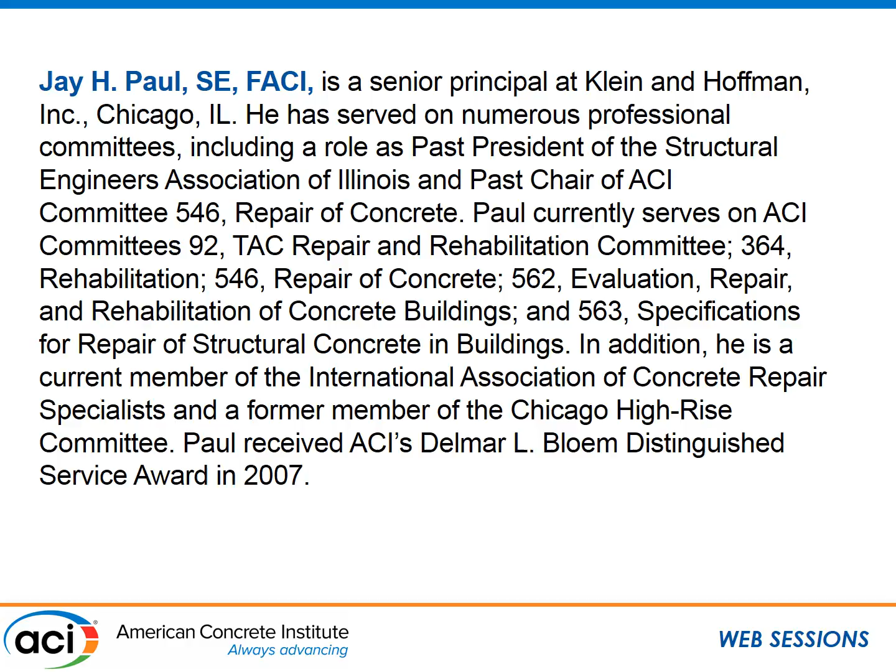I'm going to talk about Chapter 9, which is construction, and Chapter 10, which is quality assurance. This code assigns certain responsibilities to the licensed design professional, and I'm going to focus on those responsibilities.

Starting with stability and temporary shoring requirements. Typically, the design of shoring and bracing is the responsibility of the contractor. I'm going to refer to AIA Document A201, which is the general conditions used on probably most architectural jobs in the United States. It states that the contractor shall be solely responsible for and have control over construction means, methods, and techniques.

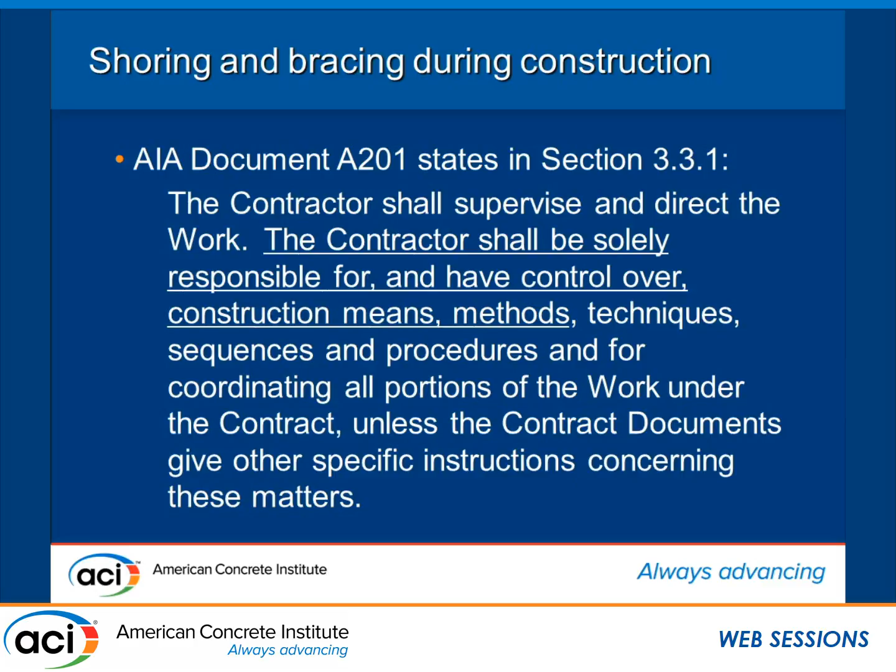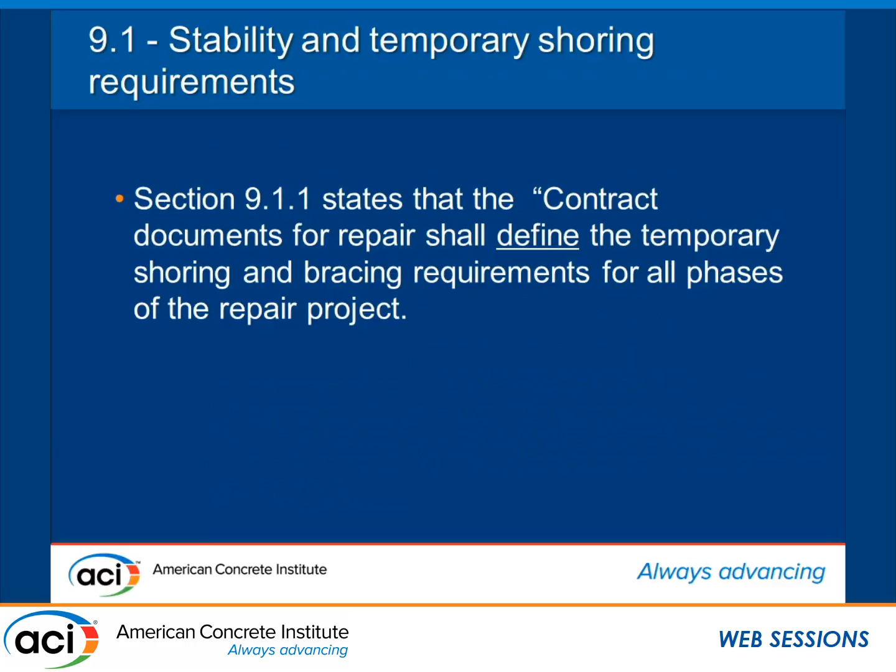Section 9.1.1 of the code states that the contract document shall define the temporary shoring and bracing requirements for all phases of the repair project. It goes further to say in the commentary that the load, spacing, and placement requirements for temporary shoring and bracing at all phases of a repair should be conveyed to the contractor.

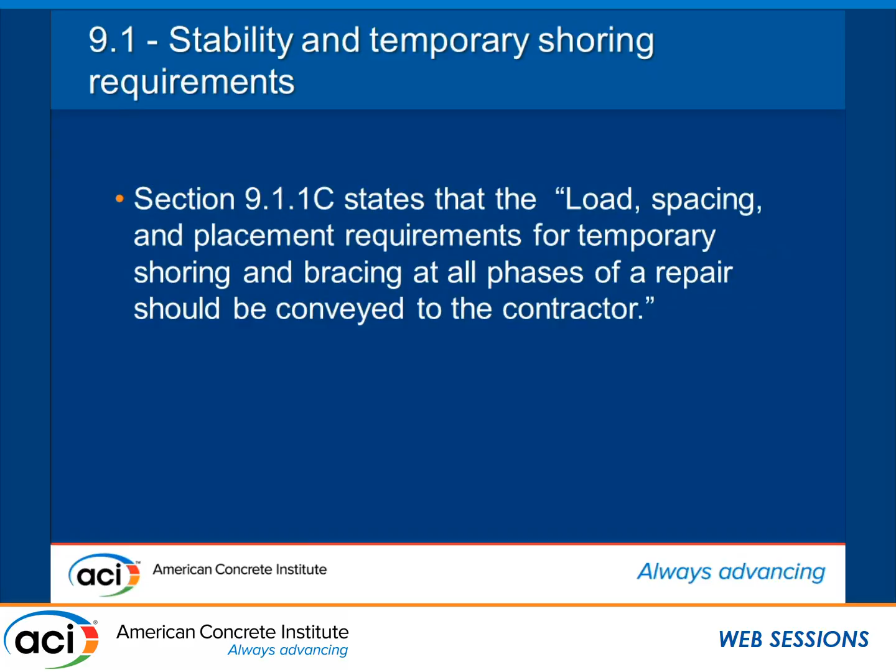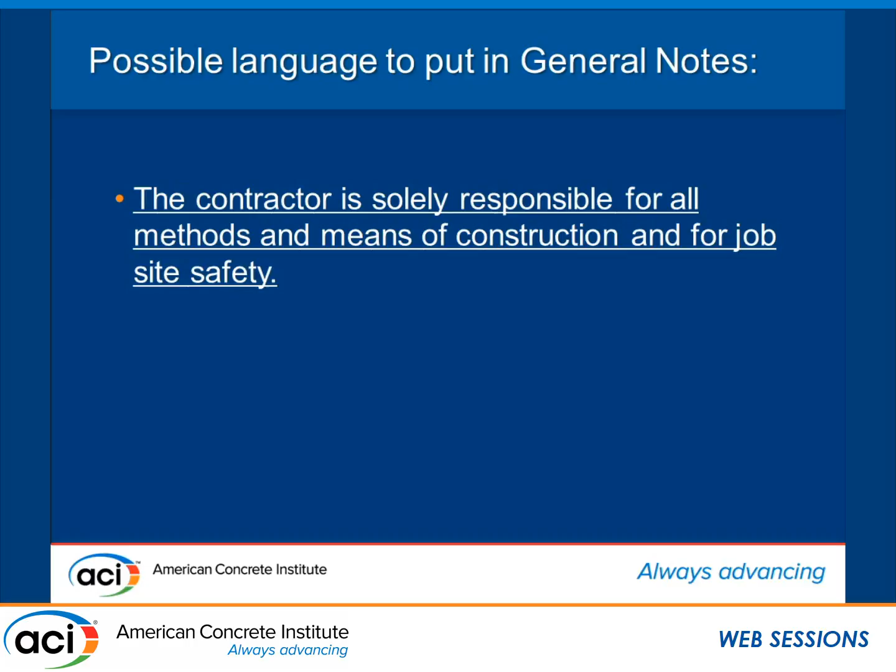This is language we put in our general notes. You may use similar language in your jobs: the contractor is solely responsible for all methods and means of construction and job site safety, and the contractor is responsible for the design, installation, and performance of all shoring and bracing.

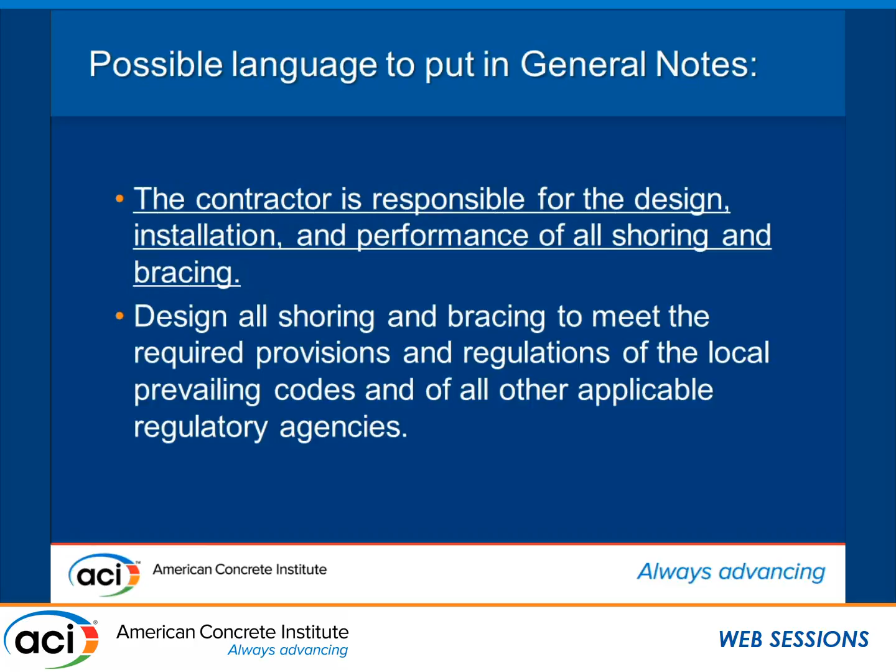But this is unique to repair work. We have a note that says, provide and install all shoring and bracing prior to the removal of concrete. That's in case something dislodges, or there are changes in moment distribution and so forth as you take these buildings apart. So it's really important to pay attention to that.

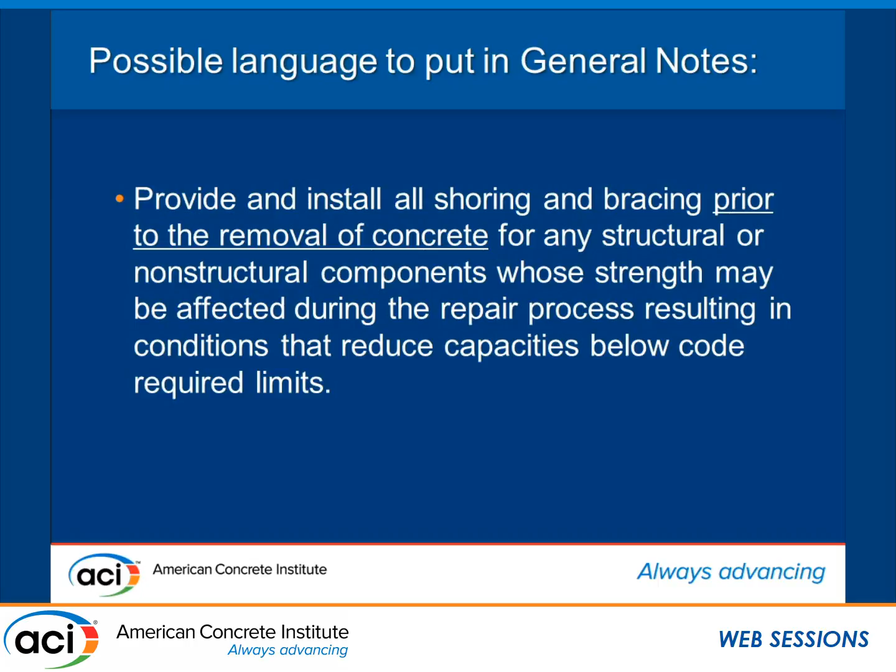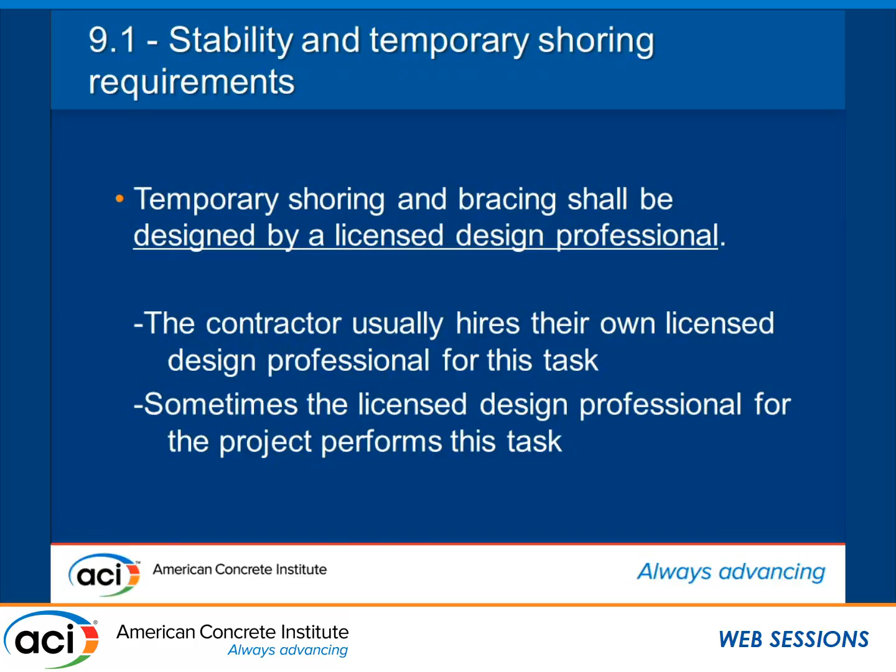Temporary shoring and bracing shall be designed by a licensed design professional. Typically, the contractor hires their own LDP for this task, but sometimes the licensed design professional for the project may perform this task.

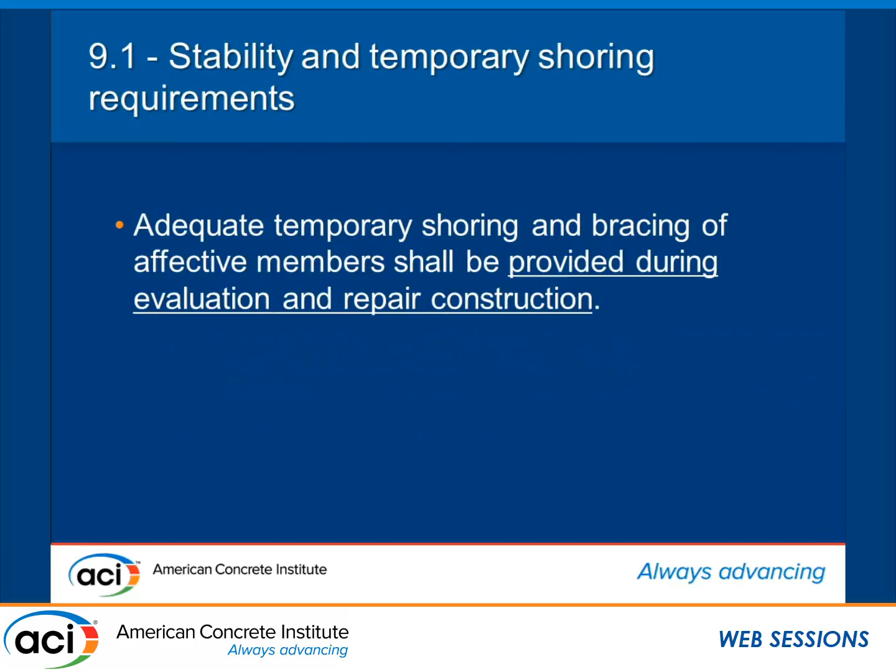Adequate shoring and bracing of affected members shall be provided during evaluation and repair construction. Typically when you start, you may not have any shoring, but there are times when it's necessary.

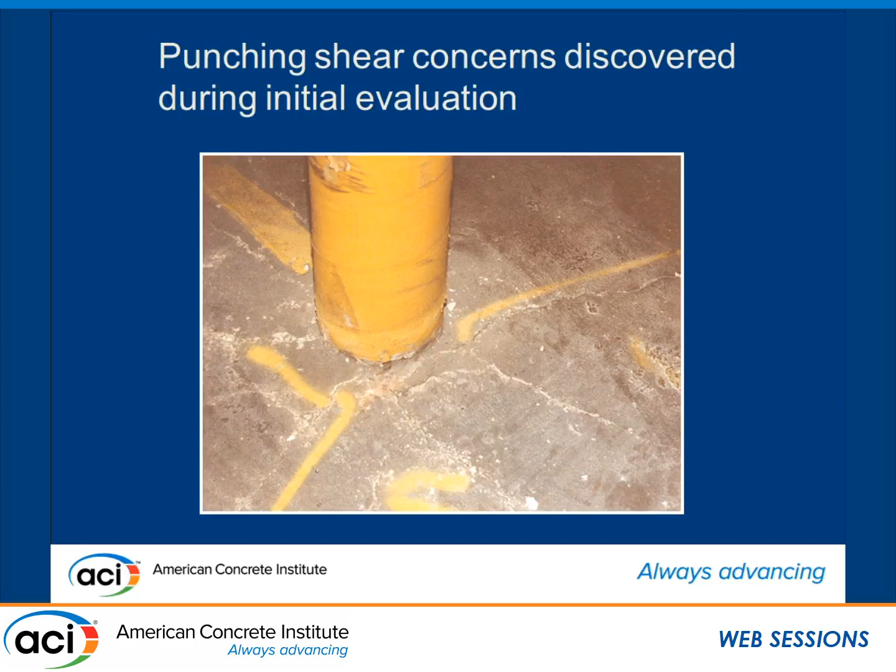This is a project that we had, the second level of a parking structure. We went in there and got very concerned when we saw the radial and circumferential cracking. Along with other tests, we determined that we have a real issue here. So we had that shored the next day by the contractor helping us with this work. And it's a good thing.

This garage was built in the 60s and it had truss bars. For what we found when we were repairing it, the truss bars had fallen over, and essentially in some spots there was no top reinforcing.

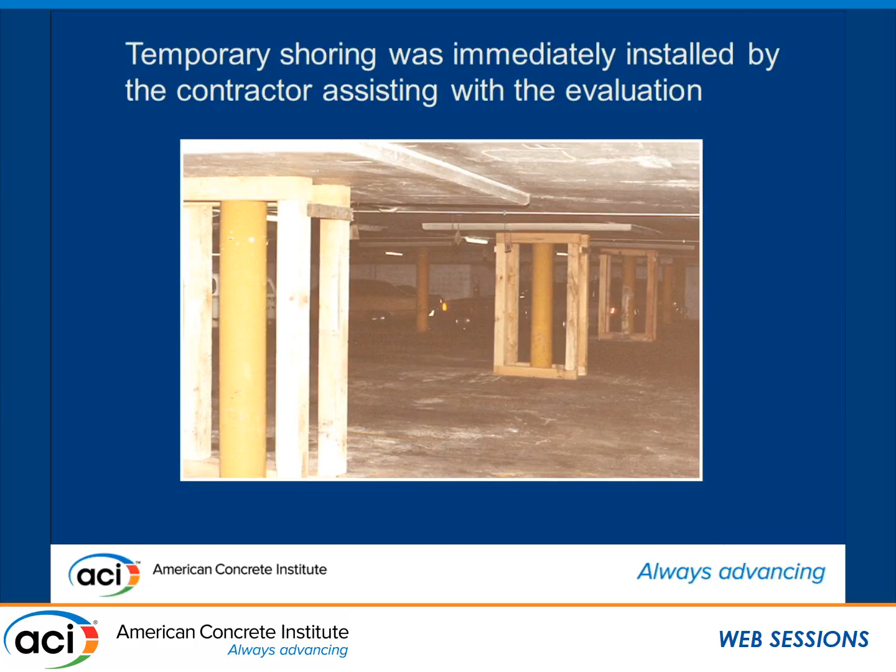Temporary shoring shall be designed to accommodate in-place conditions in the structure and expected superimposed loads.

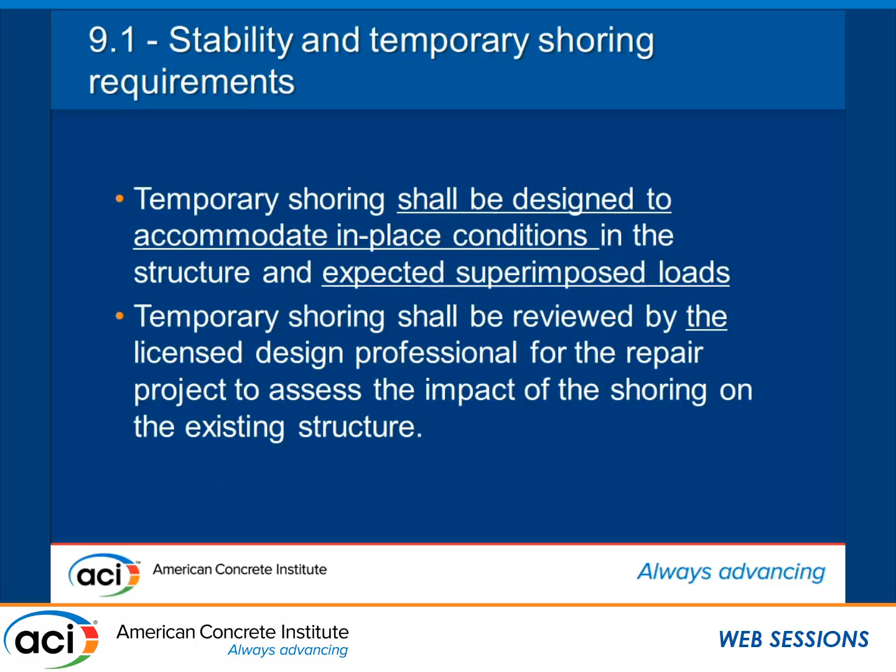It is the responsibility of the LDP for the repair to assess the impact of the shoring on the existing structure. Here's a case in point where there's a complete balcony replacement on this condominium building. It was actually our project. We had to check how many levels of balconies that shoring had to extend down to, until we picked up the construction loads.

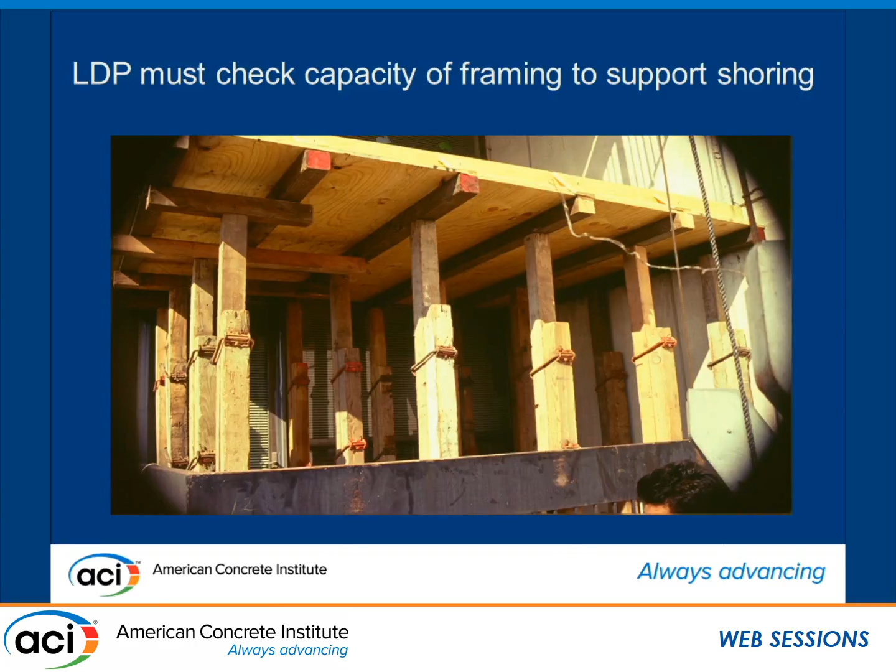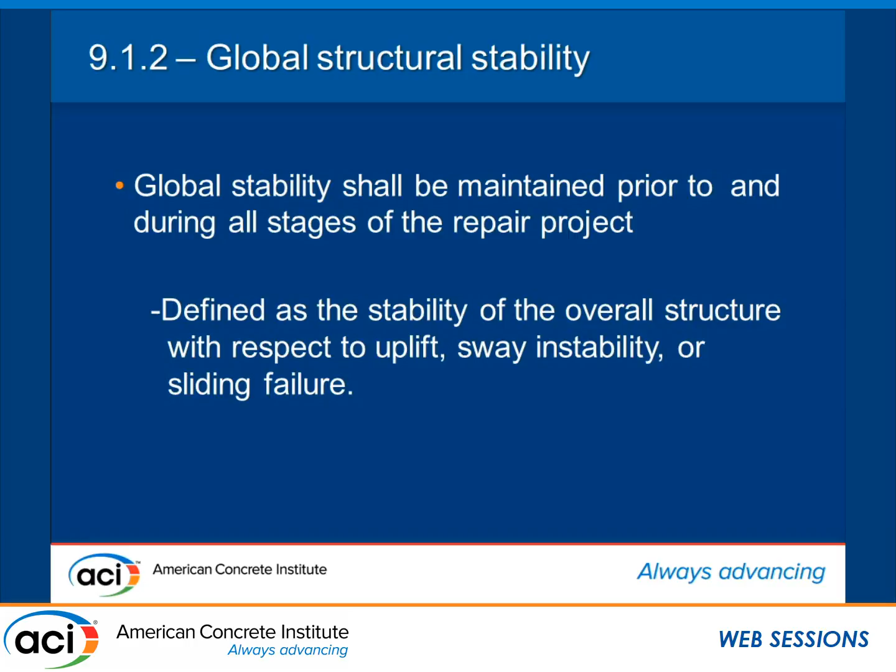Code requires that global stability shall be maintained prior to and during all stages of the repair project. Global stability is defined as the stability of the overall structure with respect to uplift, sway, instability, or sliding failure.

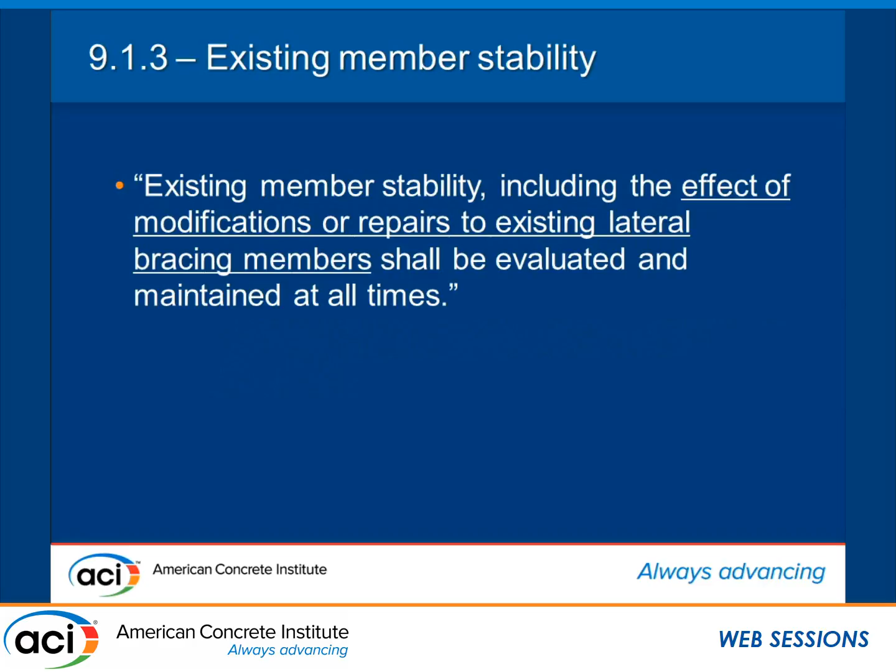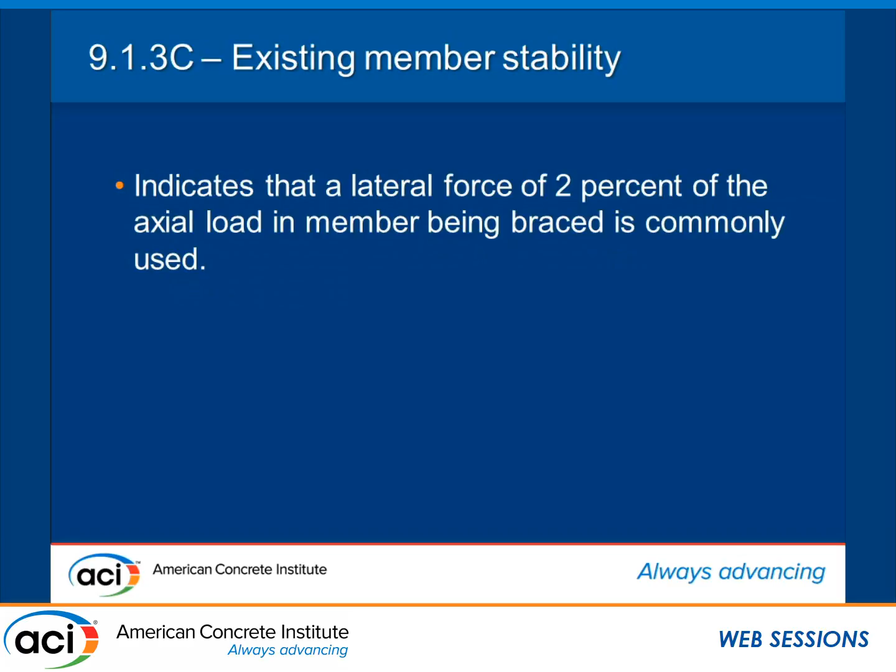We're very concerned about the effect of modifications or repairs to the lateral bracing system, especially for columns. If you remove a slab framing into that column, it may become a two-story column. The commentary indicates that a lateral force of 2% of the axial load is commonly used for the bracing force.

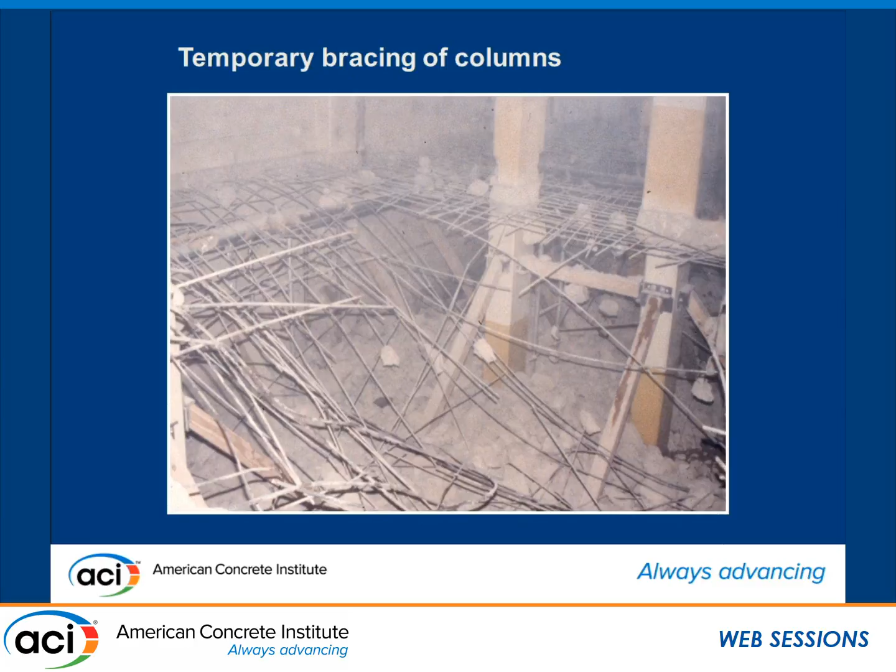Here's the interior of that same garage. We were concerned about buckling of that column, so the contractor's engineer designed this shoring system or bracing system.

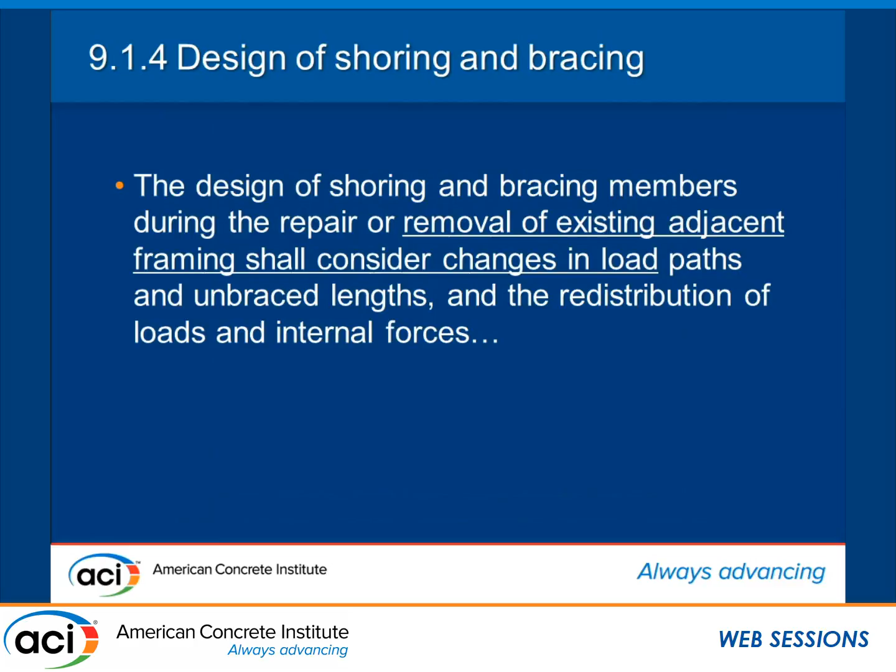The design of shoring and bracing during the repair shall account for removal of existing adjacent framing and shall consider changes in load paths.

We have a note on our drawings typically that if there's going to be removal of framing, the adjacent bays should be shored. The reason we do that is to minimize the impact of increased positive and negative moments, and otherwise you're locking in these forces in the adjacent members. So we want to deal with that.

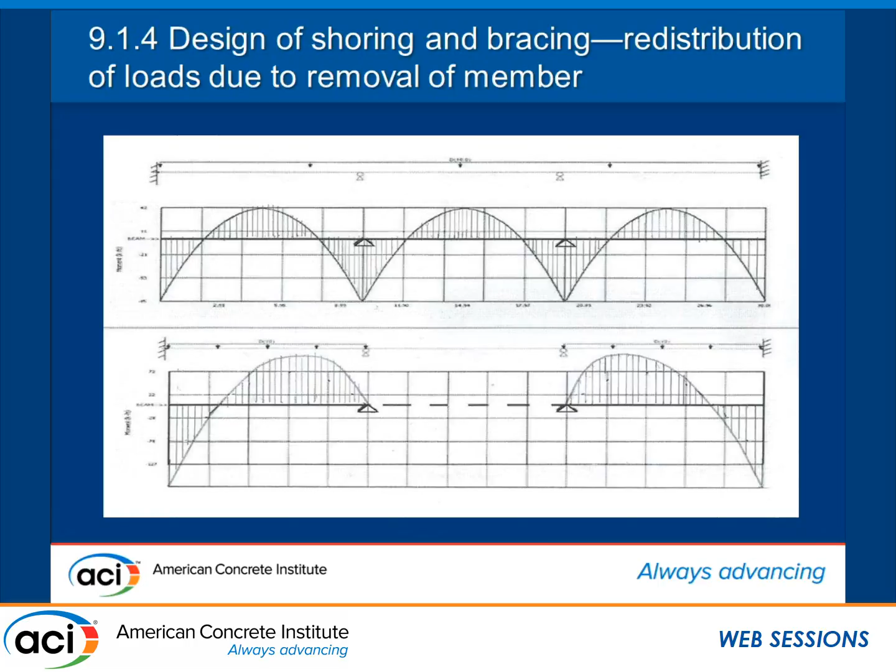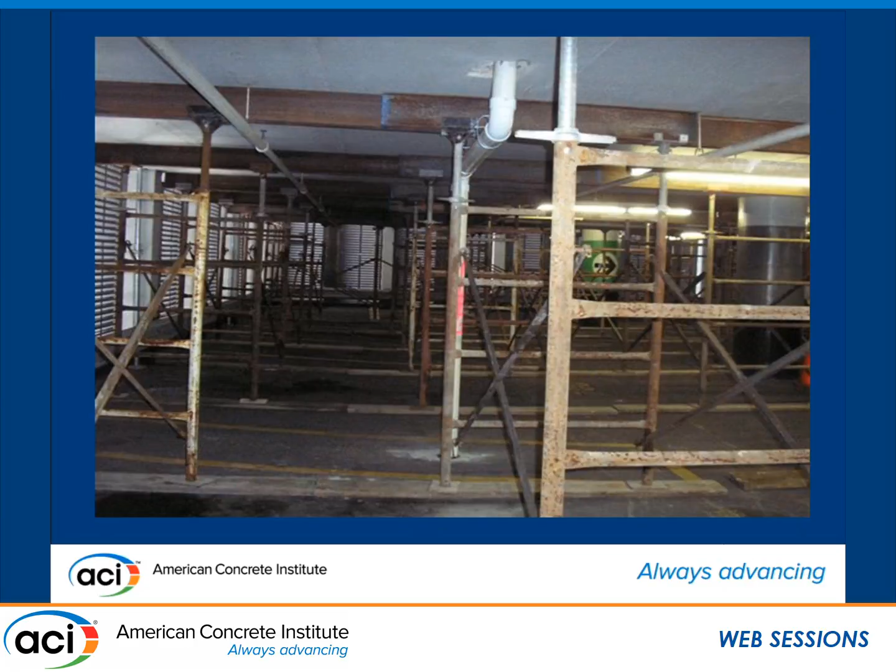This is a complete bonded overlay on this garage, so everything is shored. Obviously, the strength is reduced while that work is being done.

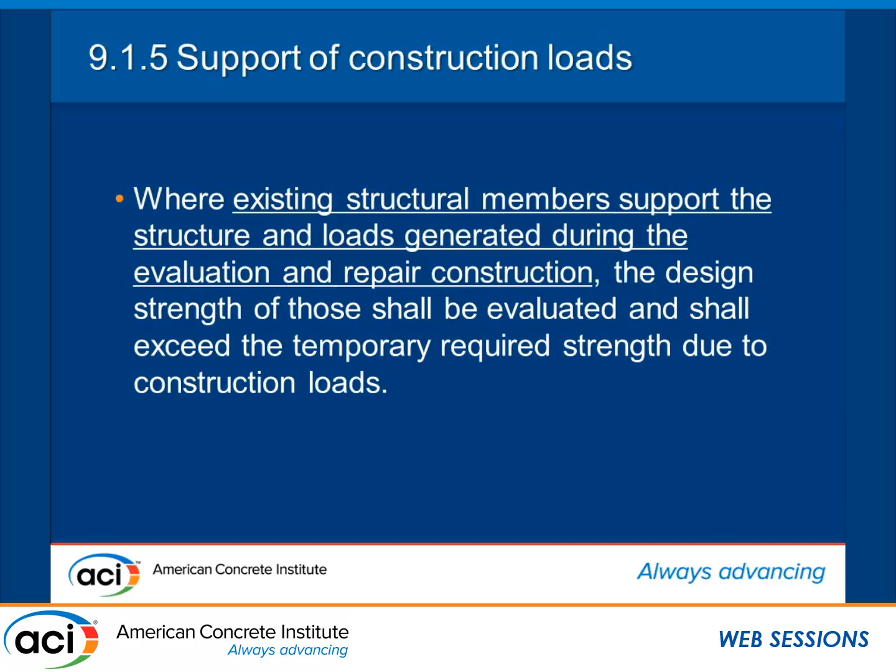Where existing structural members support the structure, and loads generated during the evaluation and repair, the design strength of those members needs to be evaluated.

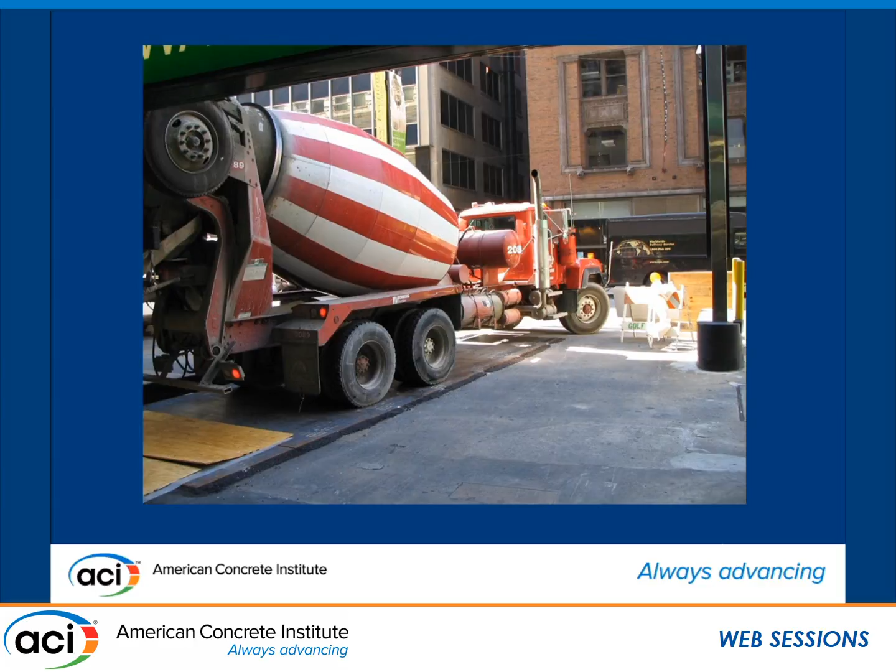Here's a case in point. This is for a parking garage. They had to bring the concrete in and back it over this driveway, which is a supported slab and framing. We found that the beams, columns, and girders beneath this were fine. However, the slab wasn't—there were some punching shear problems. So the solution by the contractor was to install steel plates.

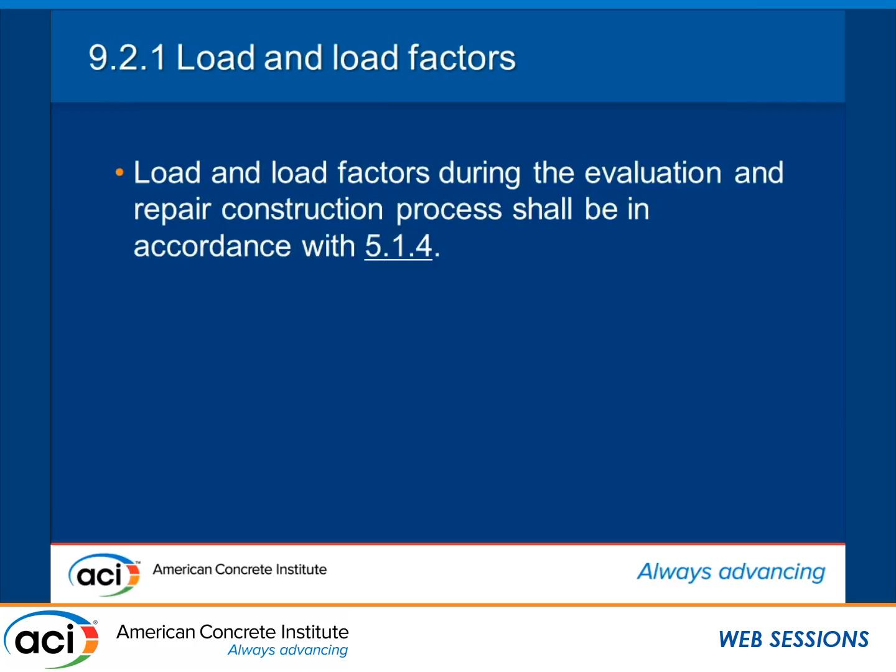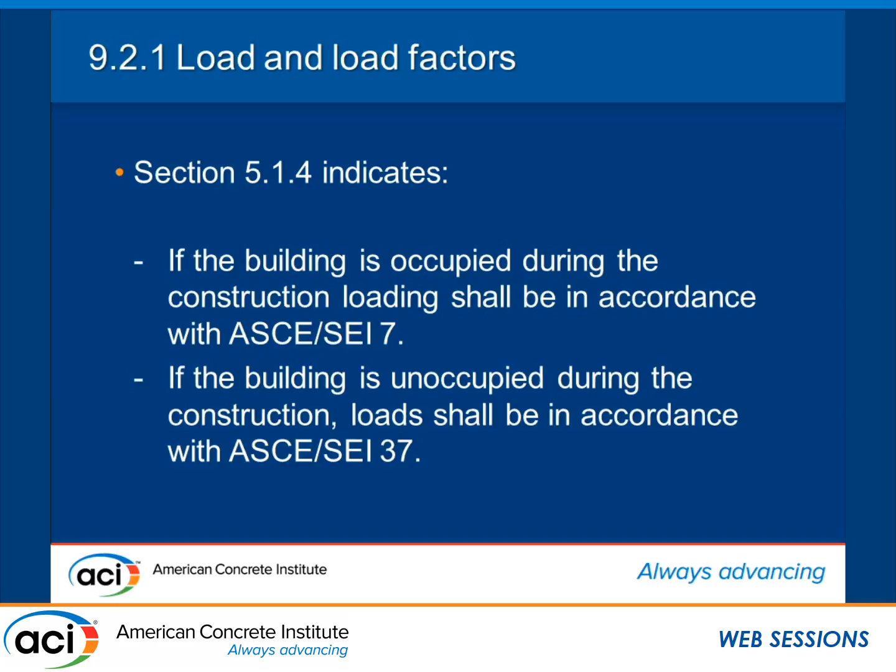Load and load factors during the evaluation and repair construction process shall be in accordance with section 5.1.4, discussed earlier. Essentially, if the building is occupied, it's ASCE SEI 7. If the building is unoccupied, ASCE SEI 37 needs to be used for the loads and load factors.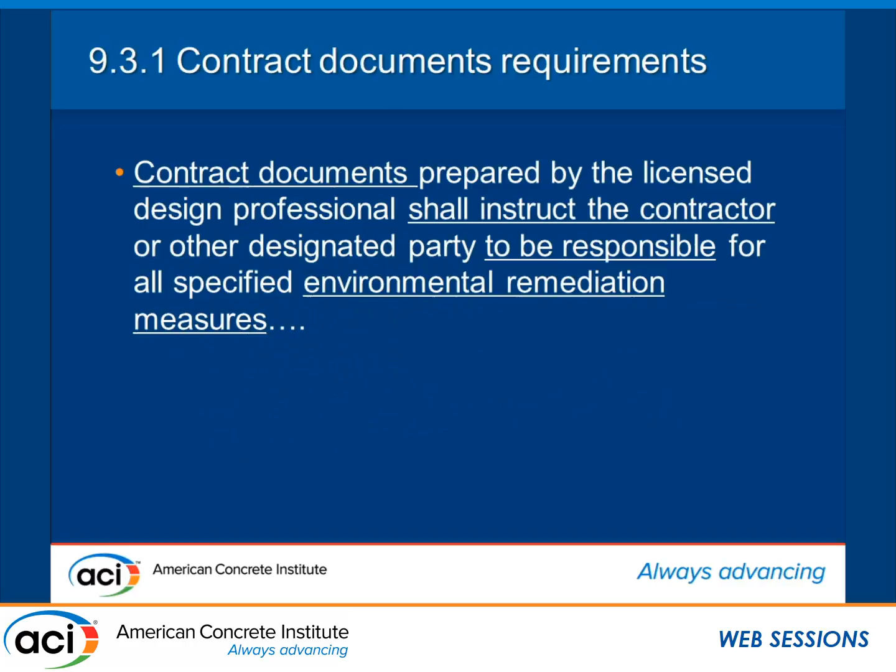The contract documents prepared by the LDP shall instruct the contractor or other designated party to be responsible for all specified environmental remediation measures.

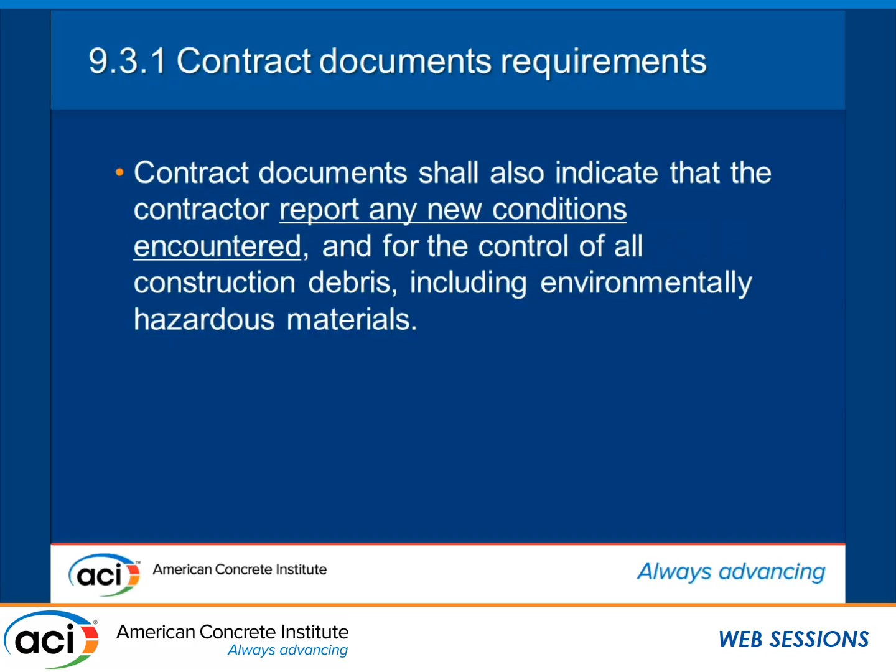The contractor shall be instructed to report any new conditions encountered, including environmentally hazardous conditions. Referring back to AIA A201, it states that the contractor is responsible for compliance with any requirements in the contract documents regarding hazardous material. But it also states that if the contractor encounters a hazardous material or substance not addressed in the contract documents, the contractor shall stop work immediately and report the condition to the owner and architect in writing.

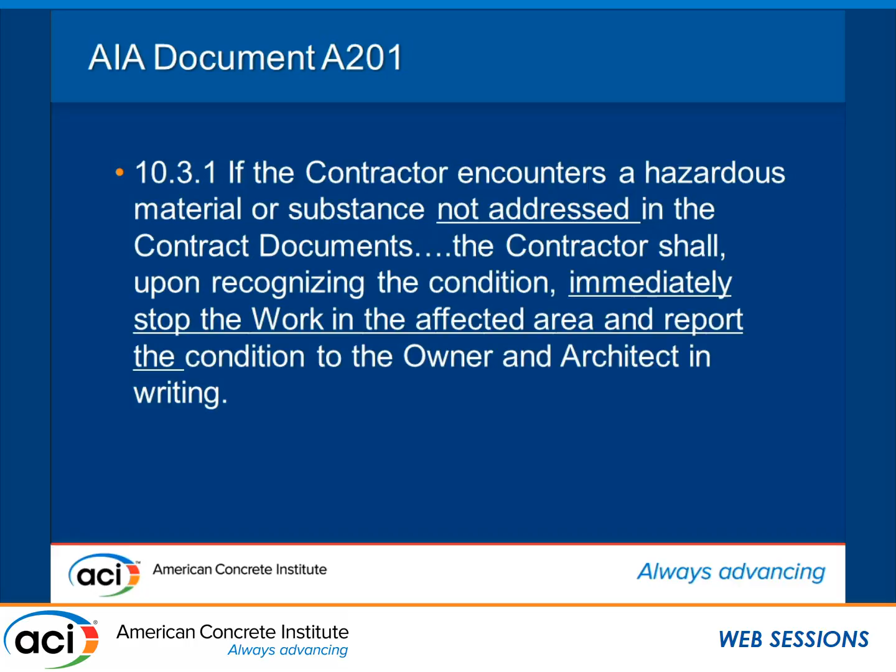Here's a case study illustrating contract documents defining temporary shoring and bracing conditions. This is a university building in Chicago. The objective here was to add an auditorium, and above that auditorium, a ballroom. To accomplish this, we had to remove 2 columns.

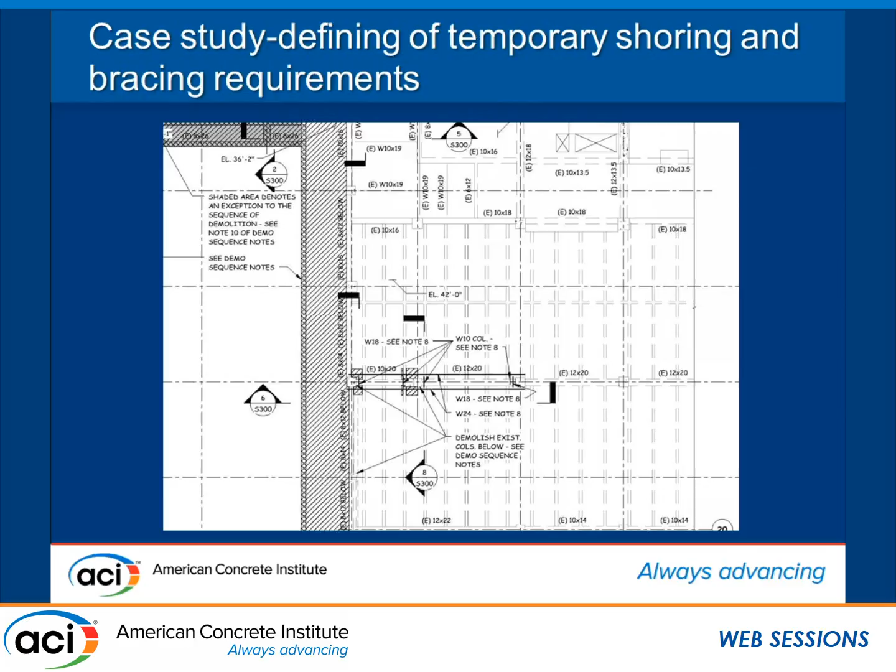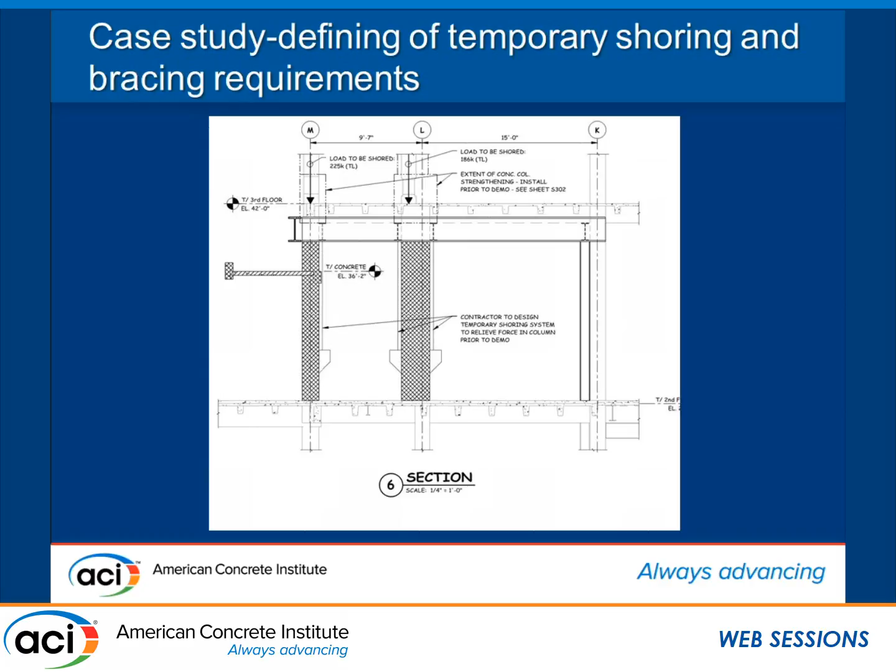So we framed the columns to a new truss. It doesn't show here, but we have a truss framing 3 bays. Let me go back again—we have the section here, across that, in front of that framing. We give the loads to the contractor, and we also have a note here that says the contractor is to design a temporary shoring system to relieve force in the column prior to demolition. It's very important. We also gave demolition sequence notes.

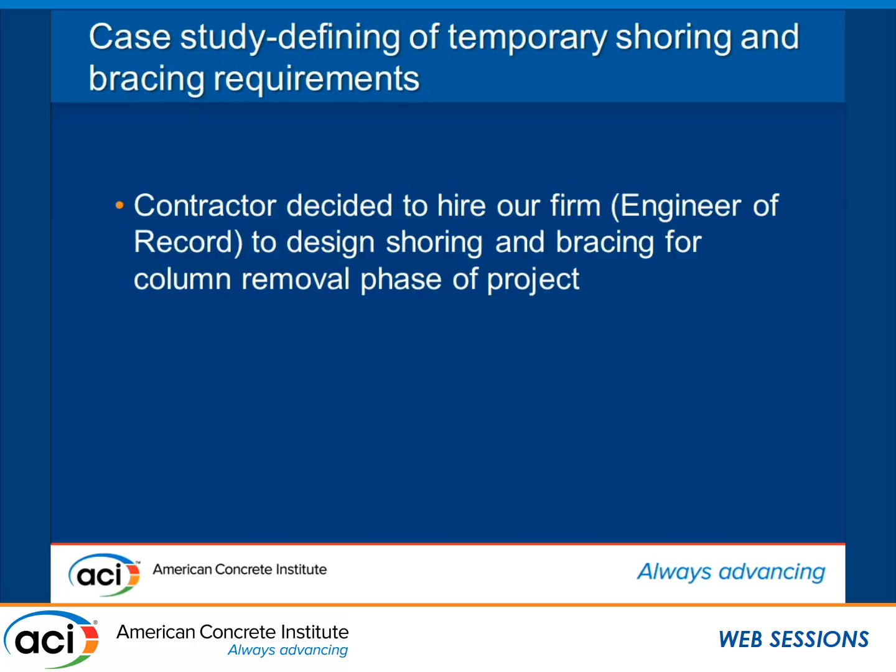However, the contractor decided not to hire his own engineer—he hired us instead to do this work. After we got permission from the university and our proper releases in place, so we limited our means and methods just to this work, we did it. We prepared a set of drawings to take care of that phase. Now our client is the contractor.

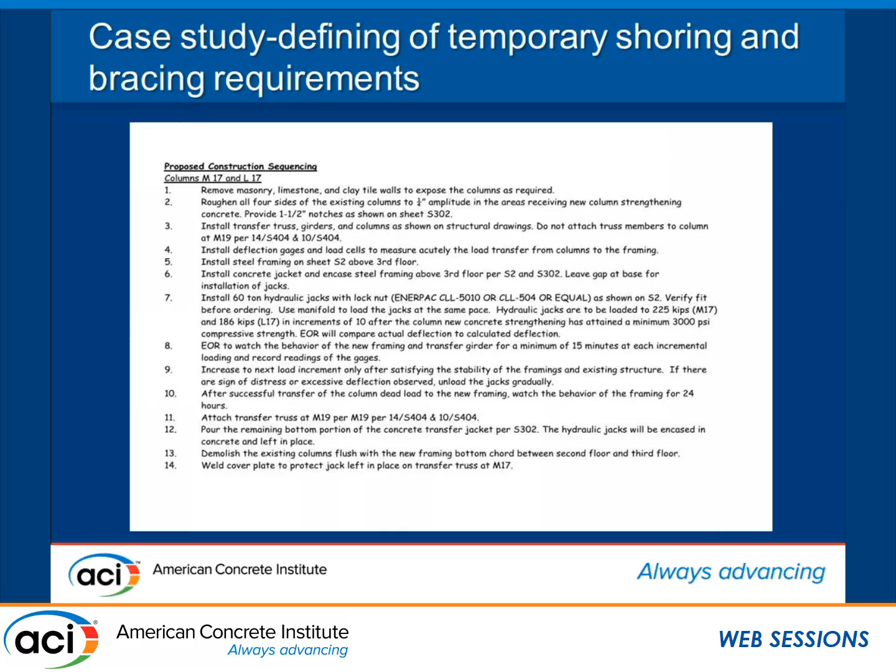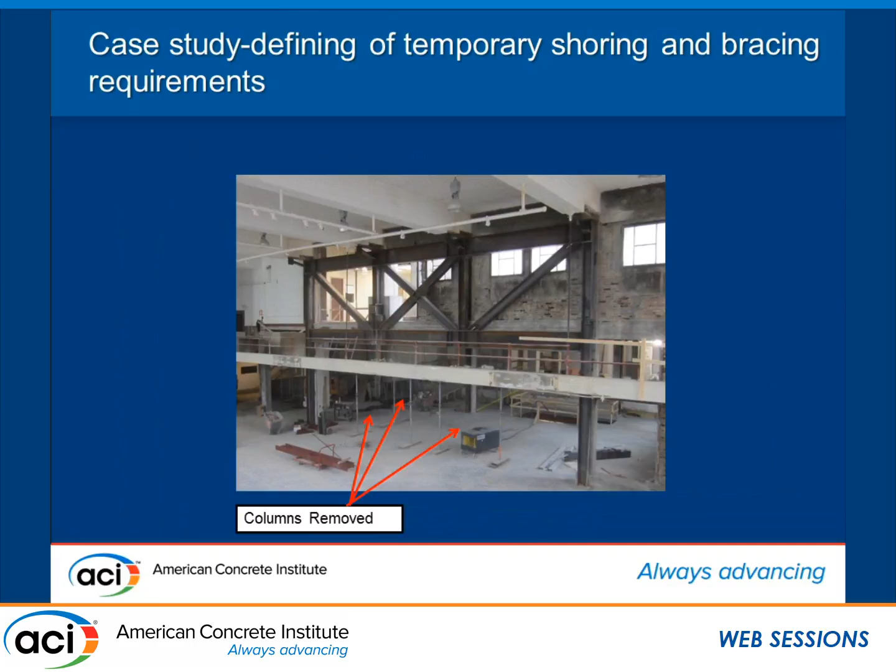I think this is a case where it probably makes more sense for the engineer of record to do this than another engineer, because we know more about this project.

The second part of my presentation is going to be about inspection. Section 10.1.1 states that the concrete repair and rehabilitation construction shall be inspected as required by the general existing building code or as required by the local jurisdiction.

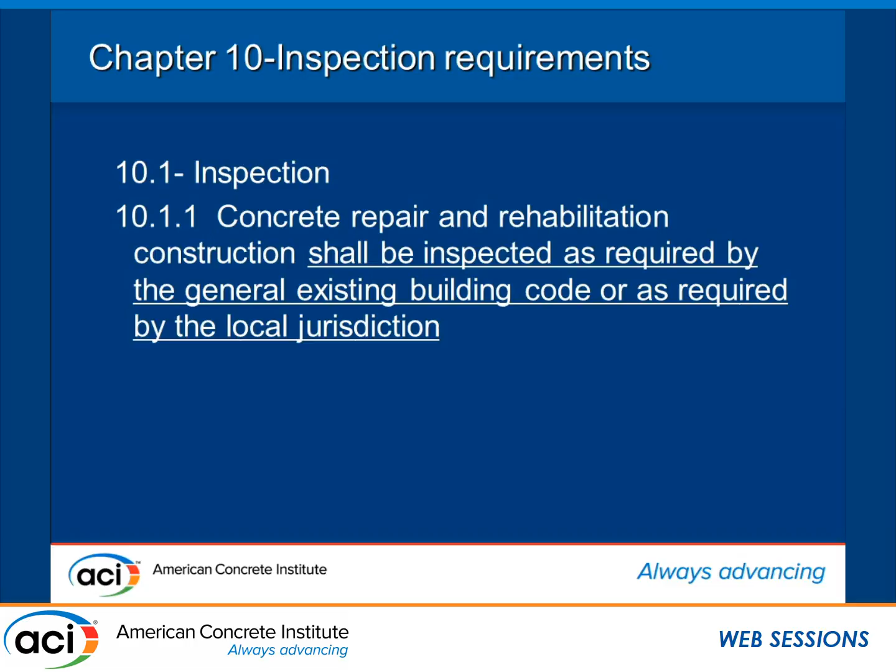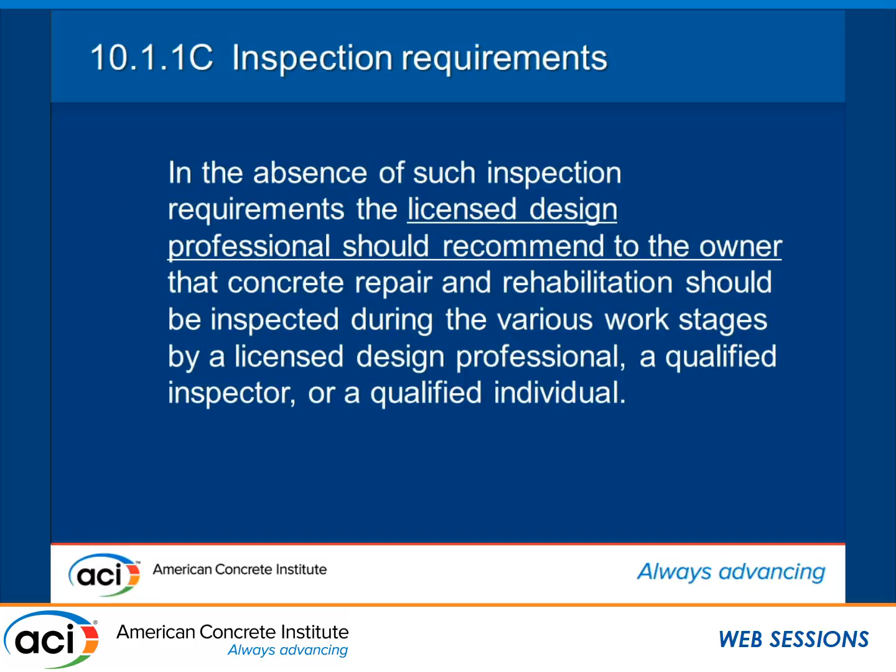Or, where I do most of my practice in Chicago, the code says nothing about it. So the code suggests in the commentary that in the absence of such inspection requirements, the licensed design professional should recommend to the owner that the concrete repair and rehabilitation should be inspected during various phases of the work.

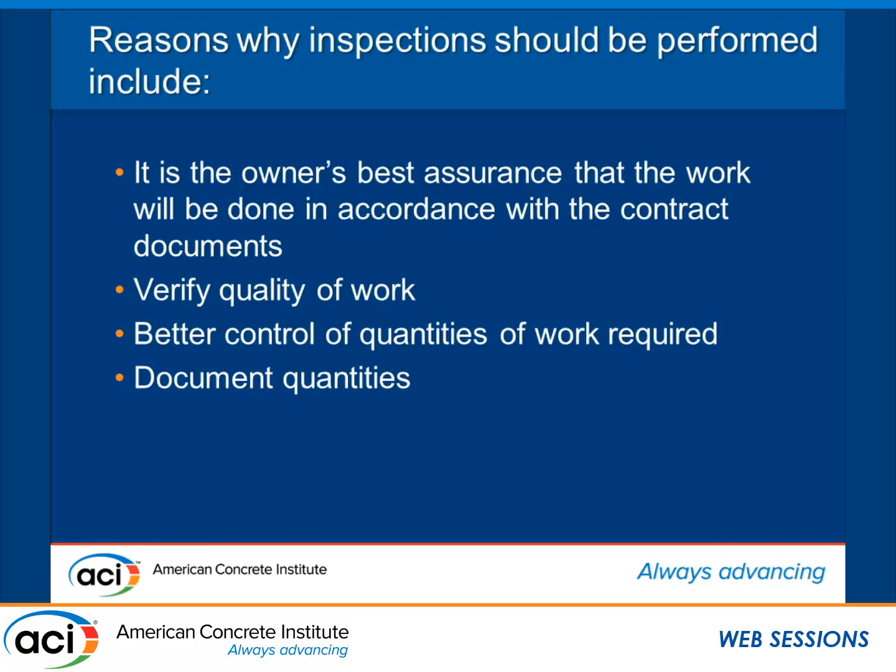And there are many reasons why it should be done. These are some of them: it is the owner's best assurance that the work will be done in accordance with the contract documents. It gives the LDP the chance to verify the quality of the work. We can better control the quantities of work required, and we can document the quantities.

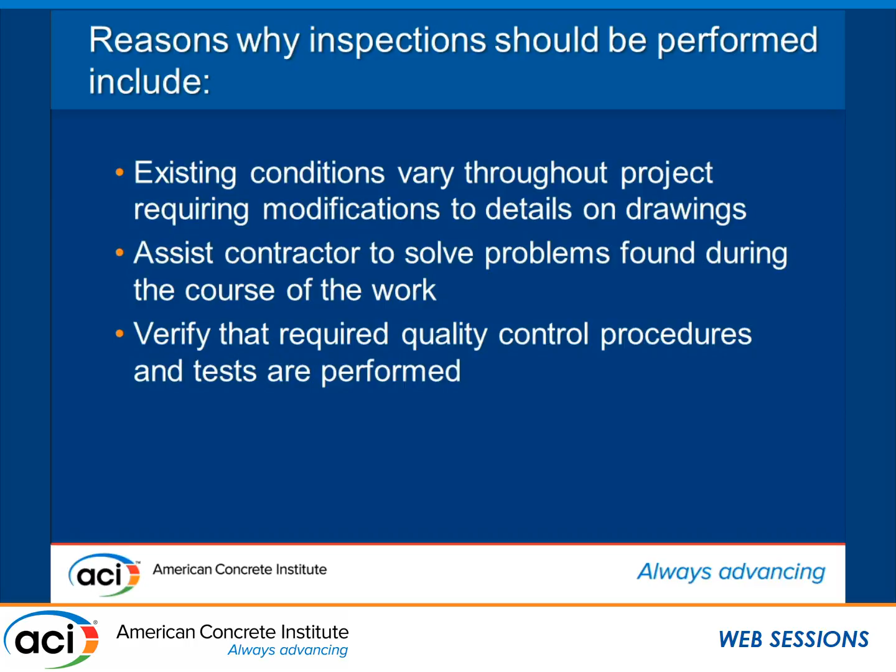And the truth is that no matter how careful we are, existing conditions vary throughout the project and require modifications to details. We consider our details to be generic—at each spot they're used, it has to be specific. We can assist the contractor to solve problems found during the course of the work. Most of these are not cost items, just one way of doing it or another. And we can verify that the required quality control procedures and tests are being performed.

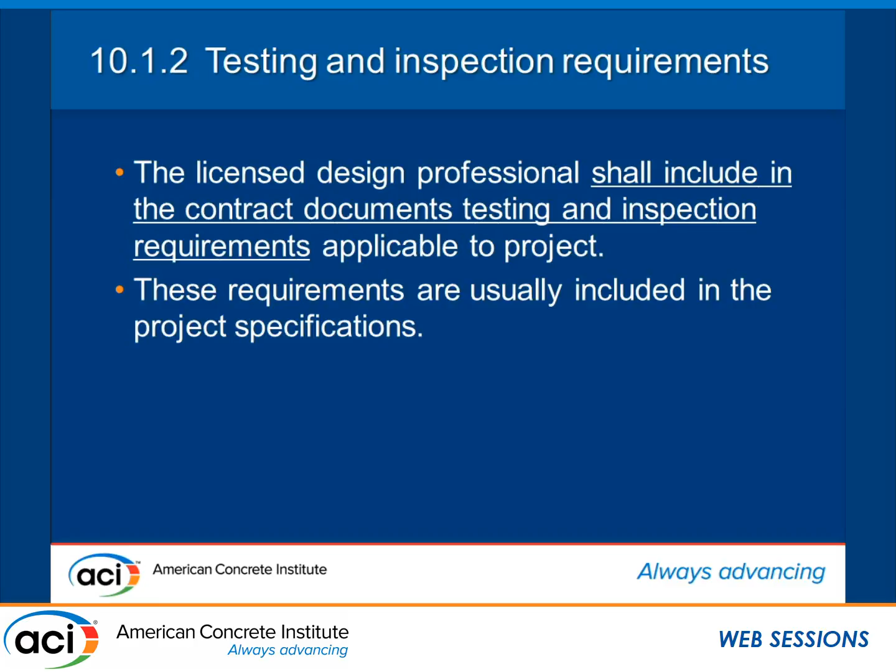The licensed design professionals shall include in their contract documents testing and inspection requirements applicable to the project. These requirements are usually included in the project specifications.

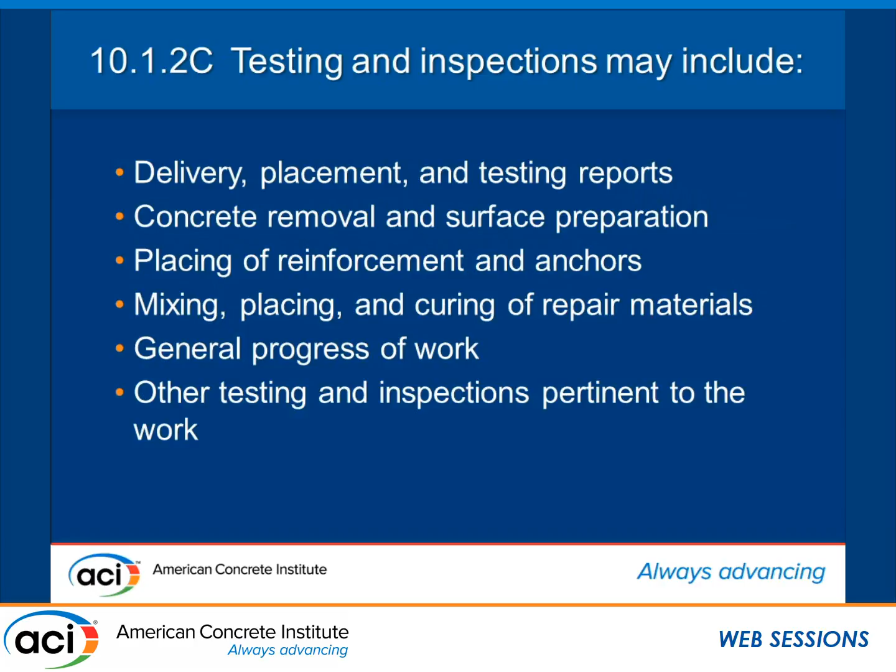The commentary lists several of the types of tests or inspections that could be done. Inspections should be performed either by the licensed design professional or repair inspectors. Eventually, after the ICRI develops their certification methods, this statement will go into the code.

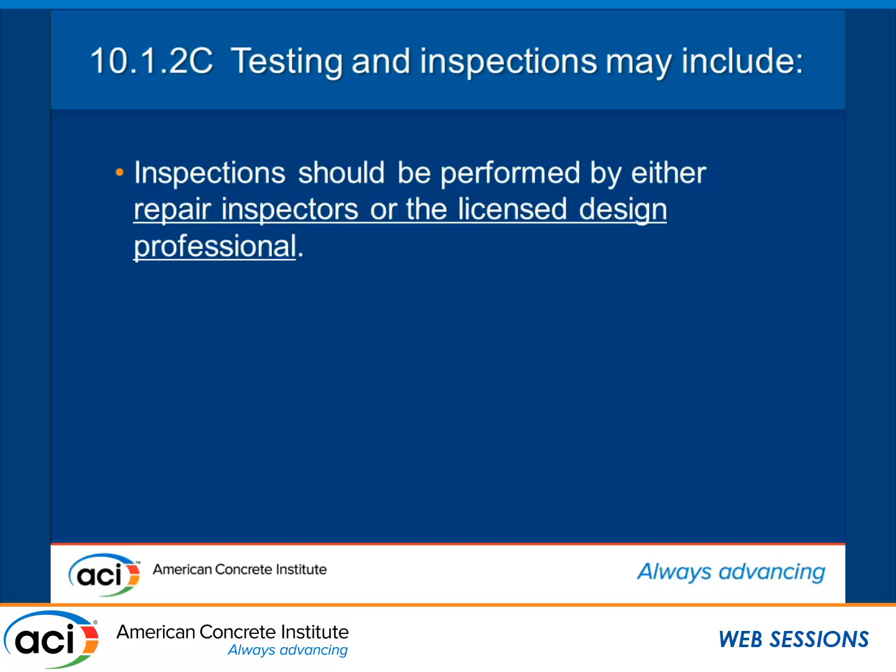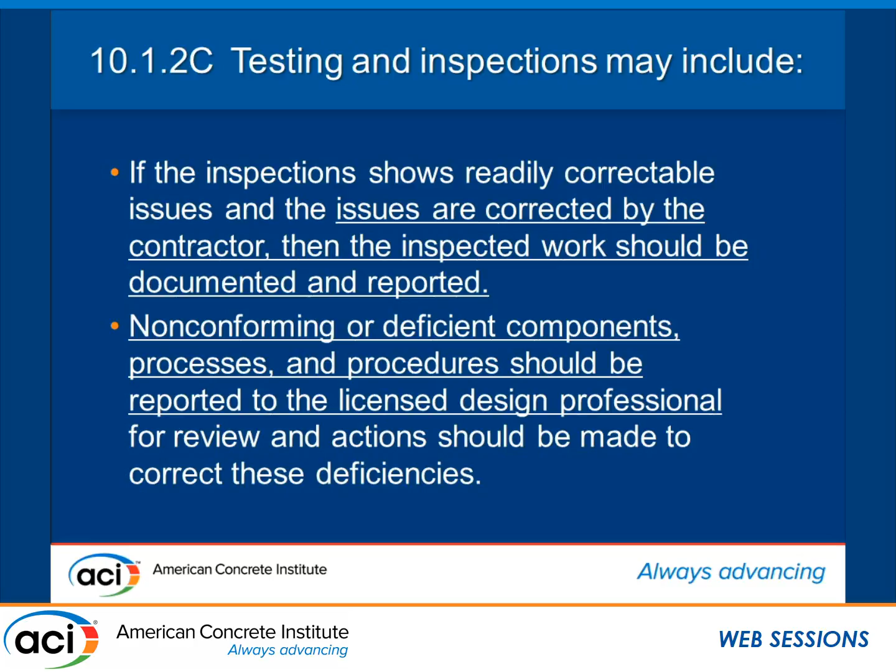The findings during the inspection should be documented and reported as required by the contract documents. If the inspections show readily correctable issues, and the issues are corrected, that should be noted and documented. Nonconforming or deficient components and processes should be brought to the attention of the LDP for review and the actions to correct the deficiencies.

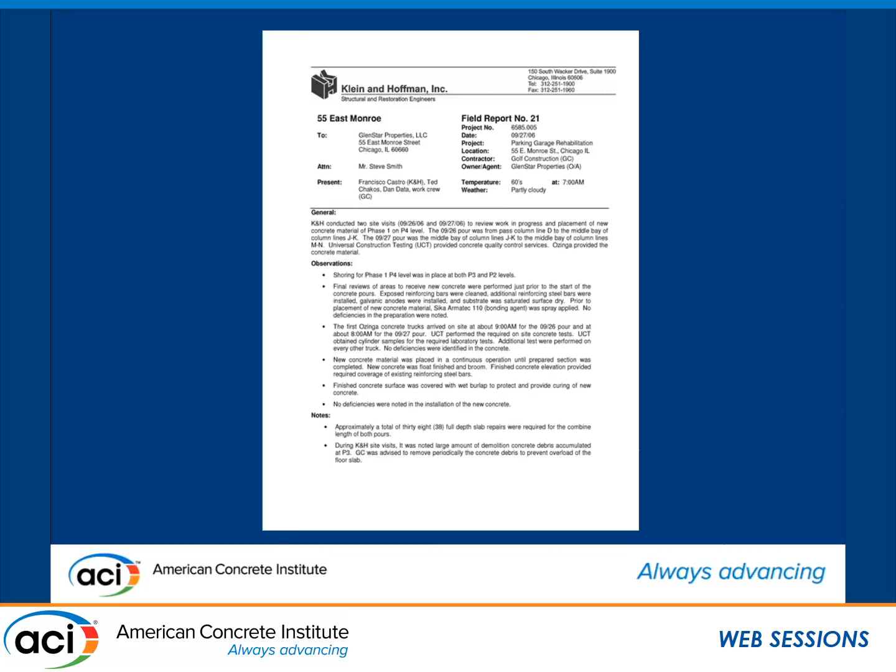Typically, and I'm sure you guys do the same thing, we have inspection reports, field reports, each time we go to the field with our observations, recommendations, and we like to keep running quantities on these inspection reports to let the client know where the job is.

Non-conforming repair construction may include existing construction that differs from the repair documents, existing construction deterioration, distress, or levels of distress beyond those anticipated in the design of repairs. These usually result in extras, so we always tell our clients to include a contingency. Sometimes we ask for as much as 20%. It depends on how confident we are on what's there.

And if there's deficiencies in the construction process and the procedures, that's usually the contractor's, it's in his bucket to fix it.

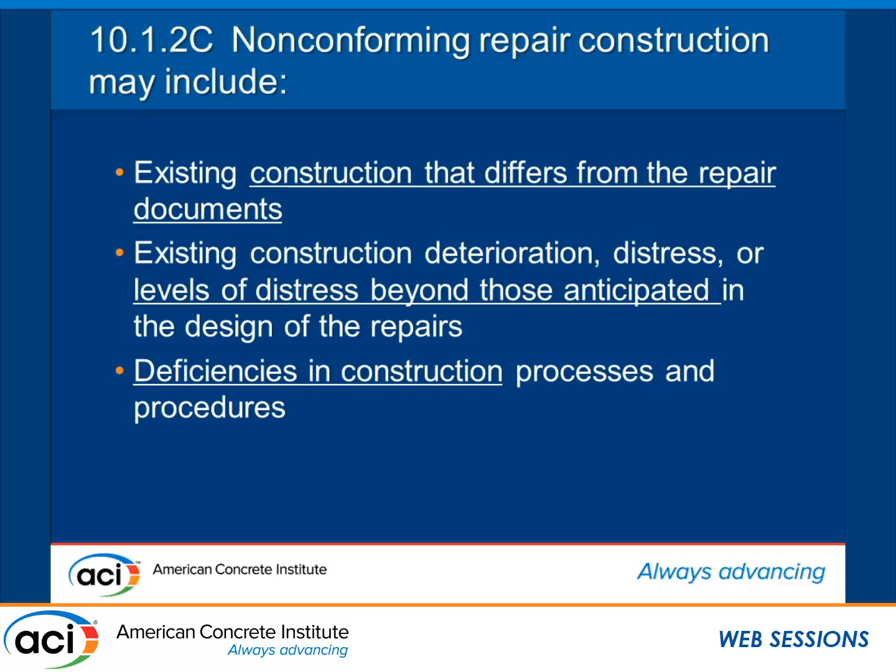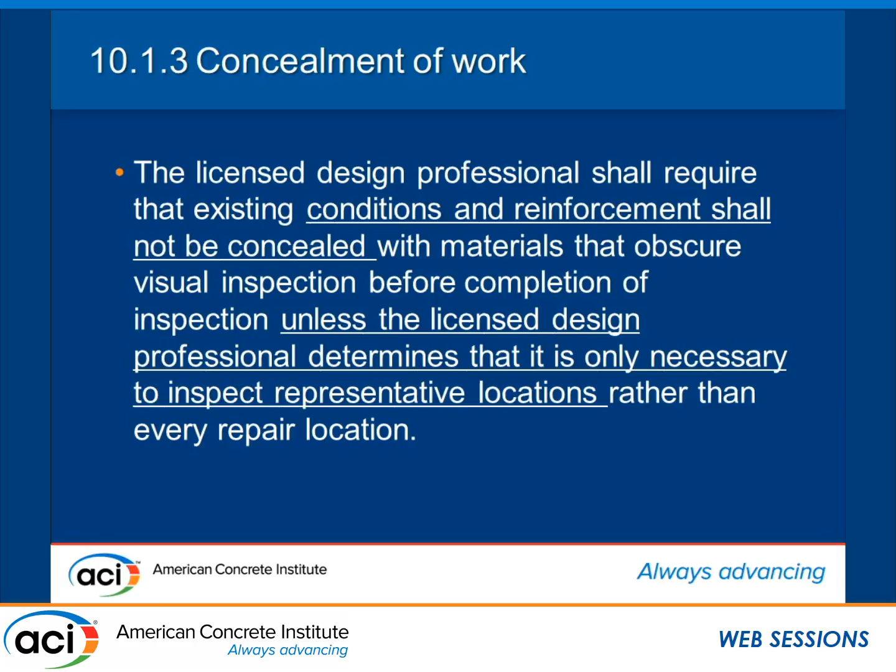The licensed design professional shall require that existing conditions and reinforcement shall not be concealed prior to inspection, unless the LDP feels that they don't have to inspect everything. That may be on a facade where you have hundreds of repairs, so you may just do representative sampling.

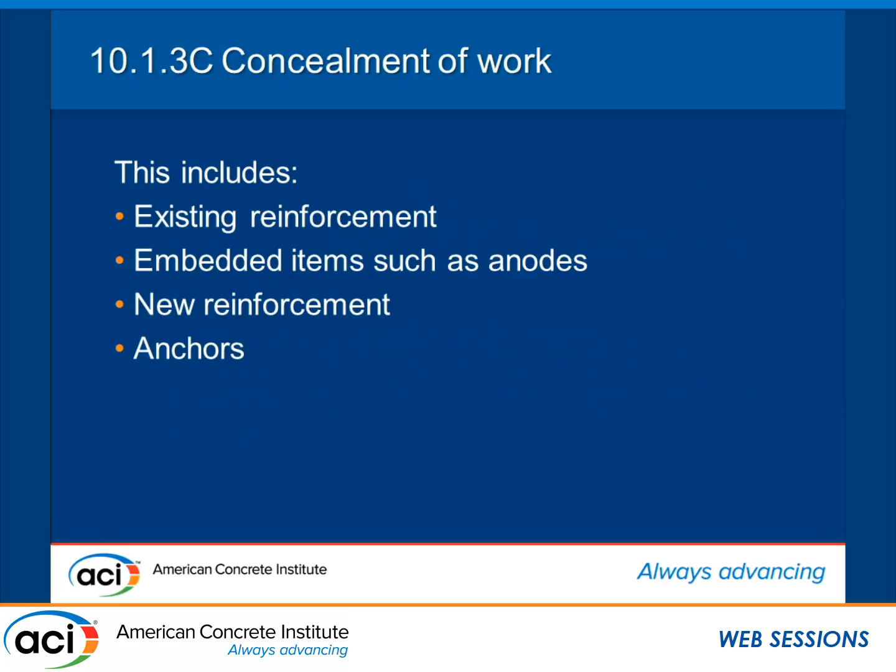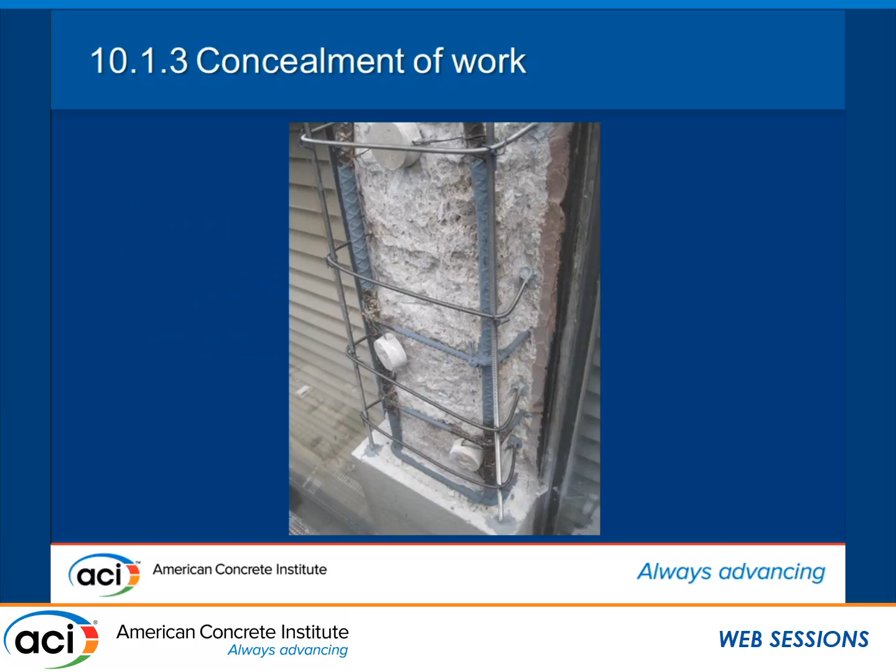Types of items for concealment include existing reinforcement, embedded items such as anodes, new reinforcement, anchors. As an example, we wanted to look at these anodes before the formwork went on. We're very concerned about continuity and that they're in the right place, and that they didn't wire the anodes onto the coatings.

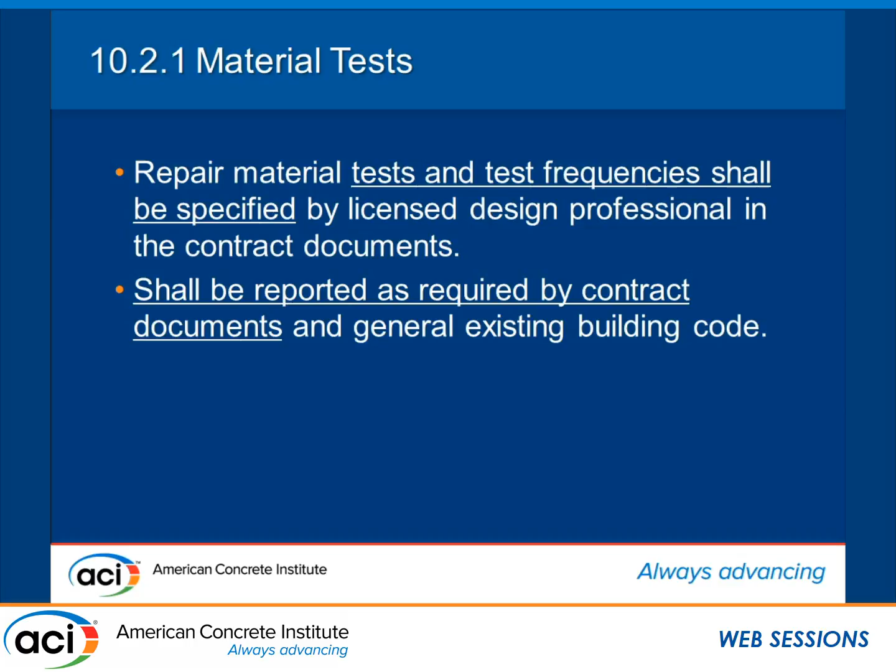Repair material test and test frequencies shall be specified by the licensed design professional in the contract documents, and it shall be reported as required by the contract documents and the general existing building code.

The licensed design professional usually must rely on the manufacturer's data for proprietary materials. Sometimes, if there's a doubt that the manufacturer's installed material does not conform to their published values, they will come out and test. Or it could be an independent testing agency, but we have done this.

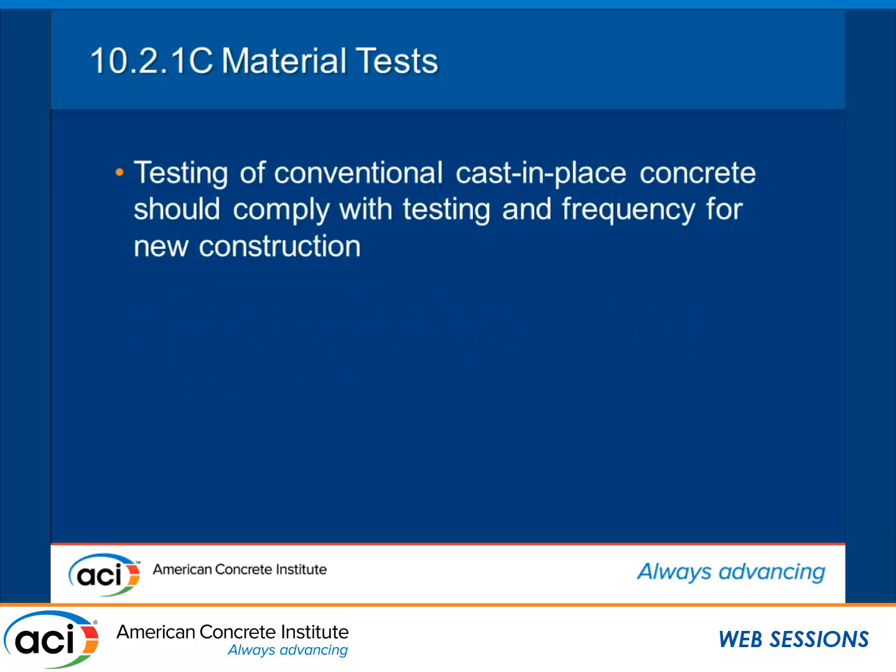Testing of conventional cast-in-place concrete should comply with the testing and frequency for new construction, and construction observation shall be performed as required by the contract documents.

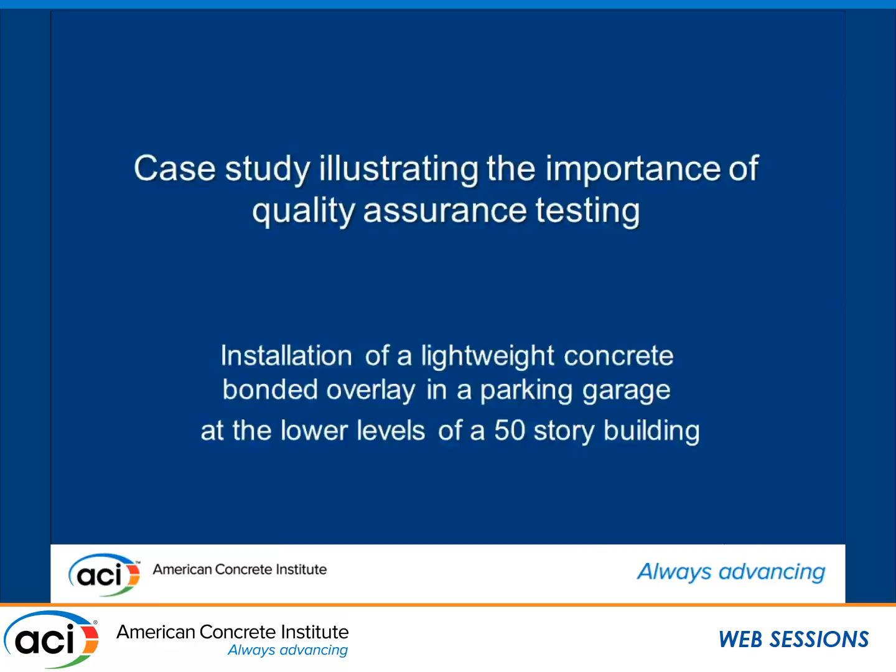This is, I think, a really good case study to show you. This is the installation of a lightweight concrete bonded overlay in a parking garage at the lower levels of a 50-story building in downtown Chicago. The lower 9 levels here are parking.

And the garage was repaired many times. A lot of delamination. We were really concerned. It's a 350-foot long building, no expansion joints, and the garage isn't heated. And it's lightweight concrete.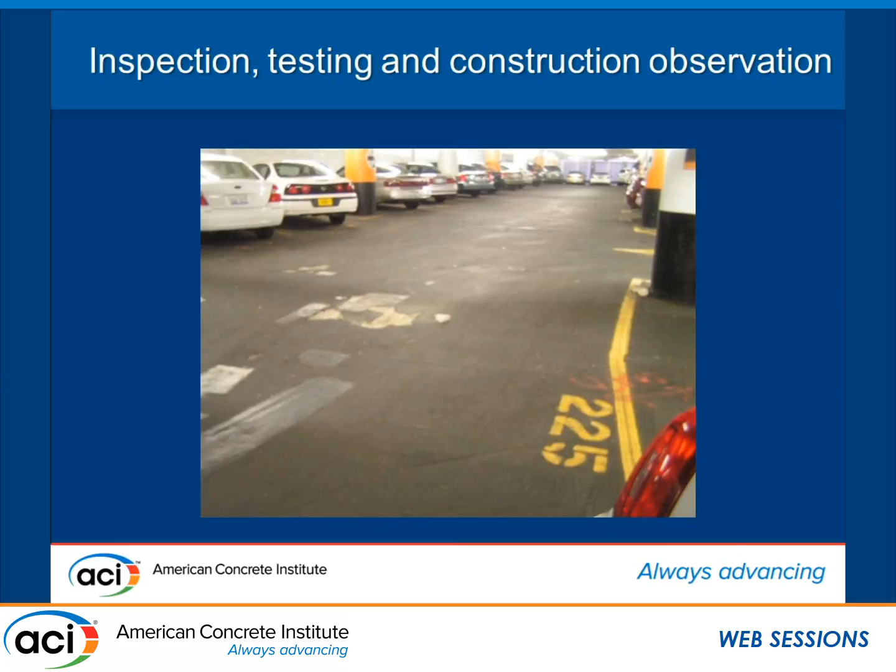Prior to the start of the production work, a mock-up was installed, which was extensively tested. The testing would include tensile bond test of the overlay concrete to the substrate. And because this is lightweight concrete, we had to make sure that we matched the aggregate as closely as possible to the original aggregate so that it would behave the same.

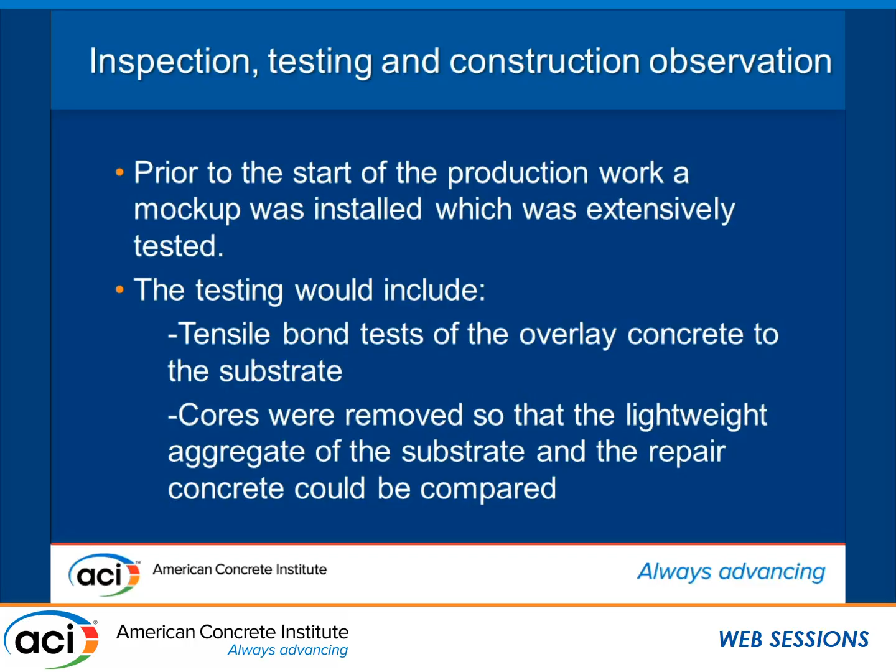I did quite a bit of talking with the people here at ACI, Ward Malisch, and we found a way of doing this. Very important.

So here the contractor decided that the best place to do the mock-up was at the highest level so they can get some sense of how long it would take to buggy the concrete up.

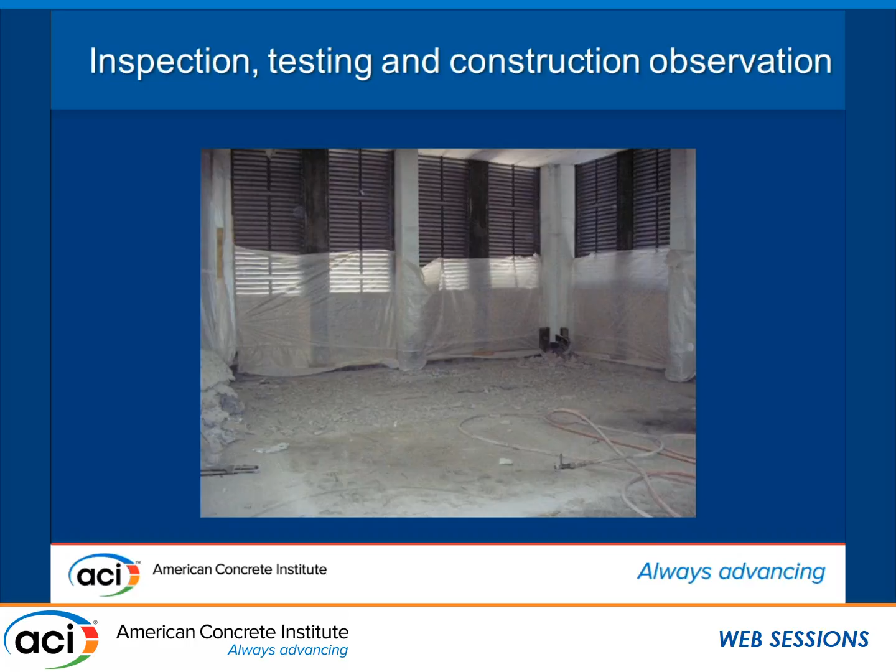This construction, or this mock-up, was done with jackhammers, very conventionally prepared. They were actually going to use hydro demolition for the production work, but that was not practical for the mock-up. This is after the mock-up was cleaned.

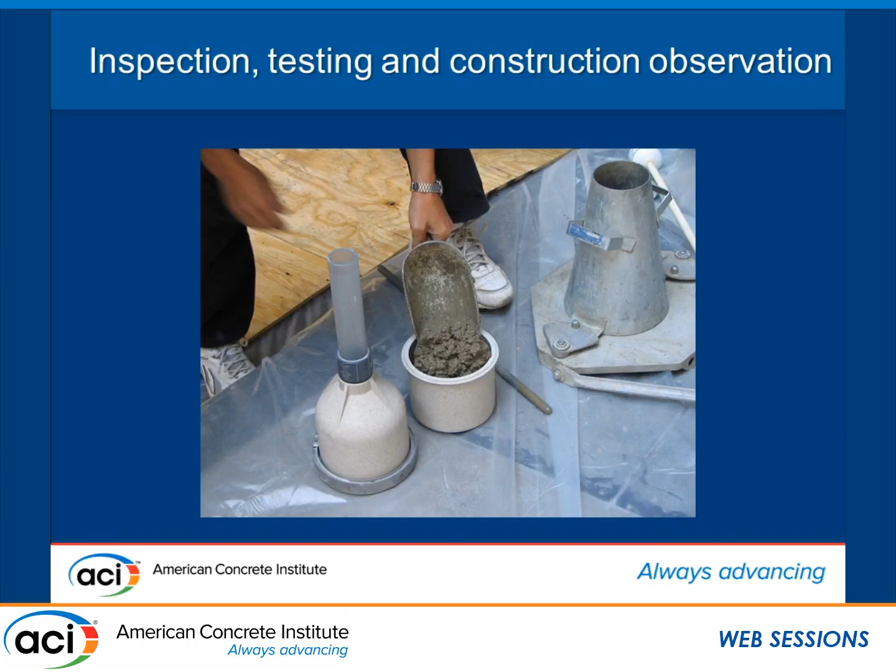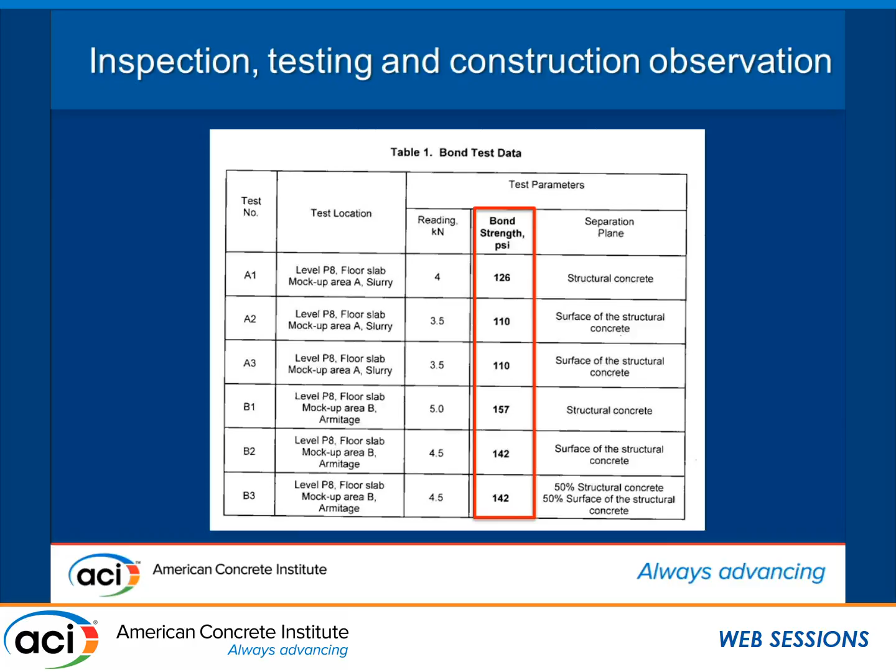We buggied the concrete up, we put it in. This is the testing of the concrete, pretty much the same as for new construction, although it's lightweight concrete. And then we did a pull-off test. We got these values, and we weren't too worried about it. We thought this was okay.

But extensive testing of the repair construction work was performed throughout the duration of the project. We did pull-off testing as recommended by ICRI. We wanted to confirm the adequacy of the bond overlay to the substrate.

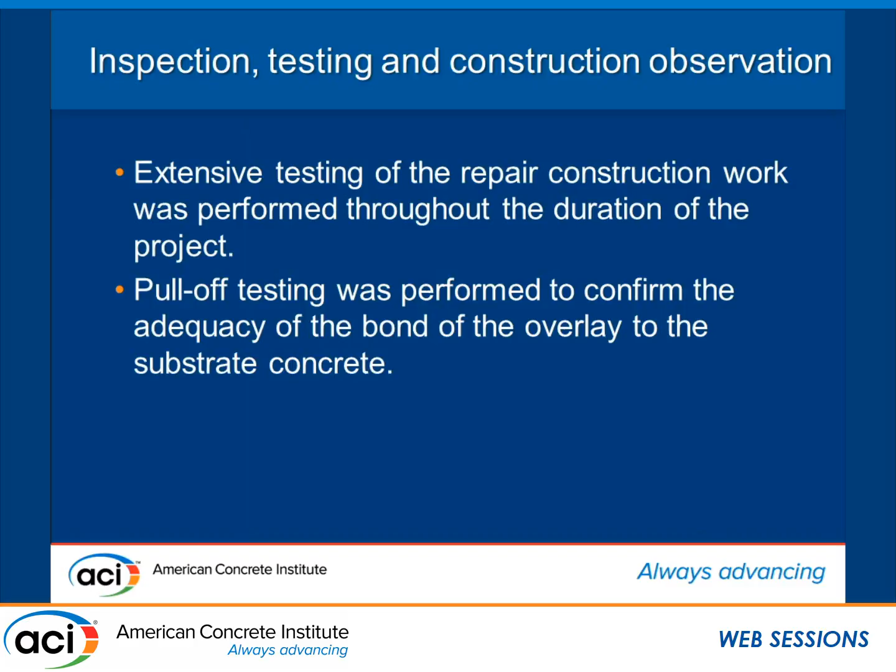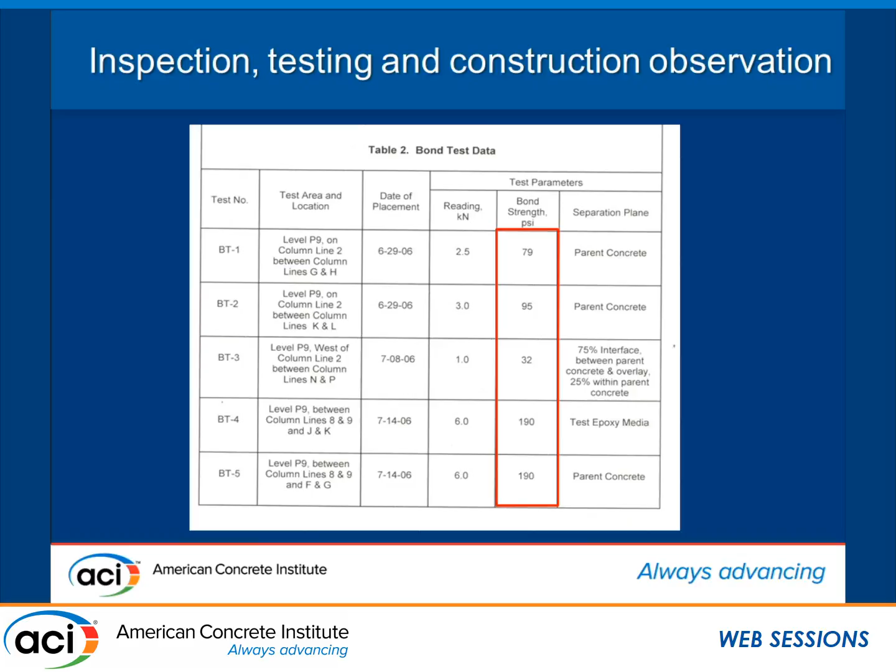So we did a petrographic examination on it, and so we found the reason was that the contractor didn't do a very good job of cleaning the surface of the concrete and left the residue. This is a very weak surface at the bond line.

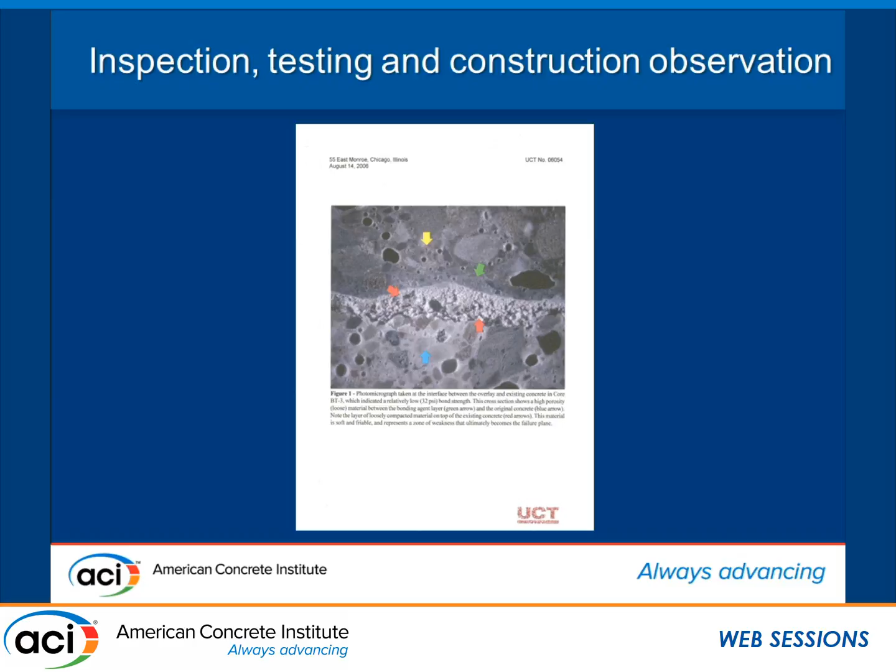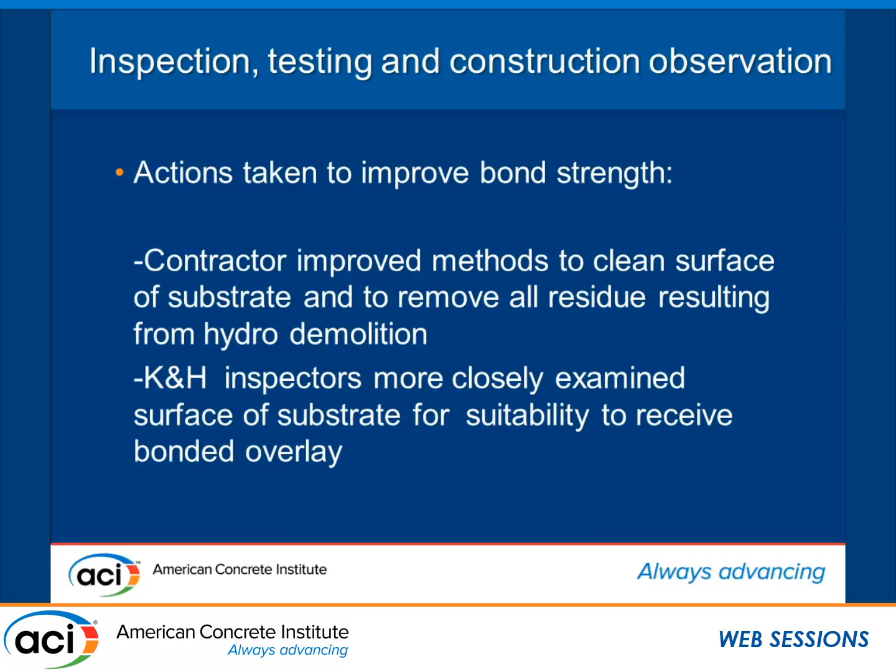So the actions taken to improve the bond strength: the contractor had to improve their methods to clean the surface of the substrate and remove all residue, and our inspectors had to step up their act too. So the results are better, not perfect, but they're better. We got some really good results.

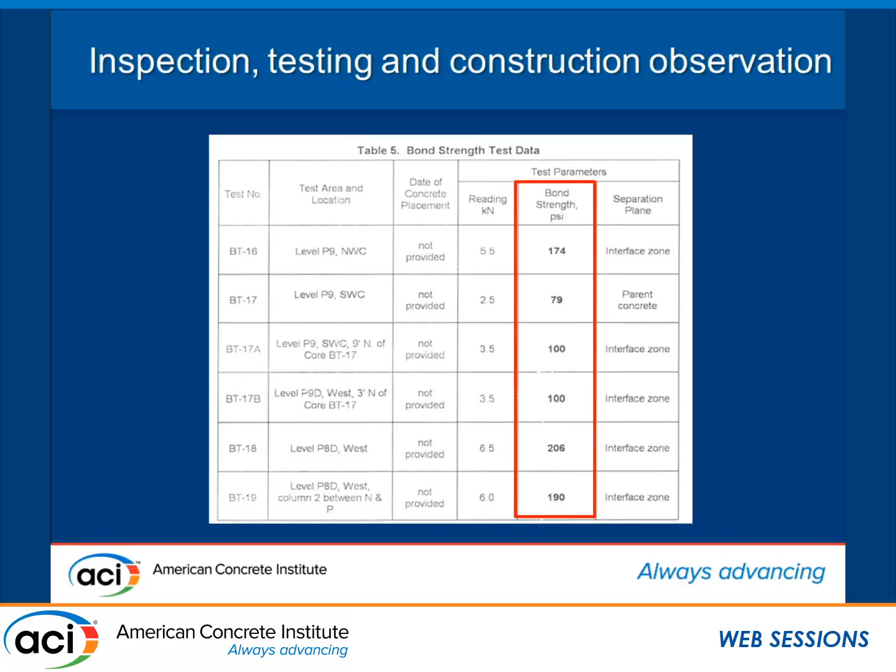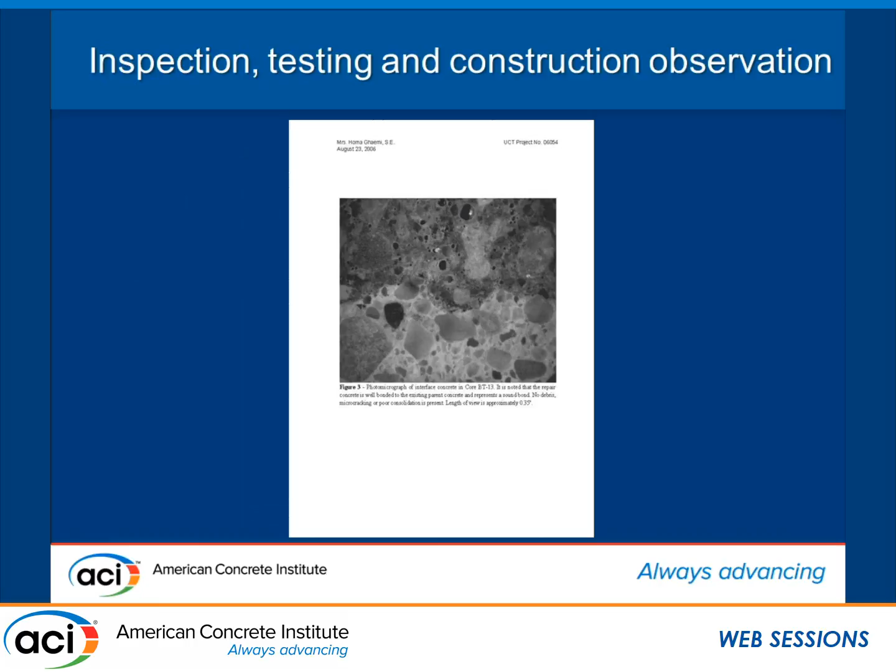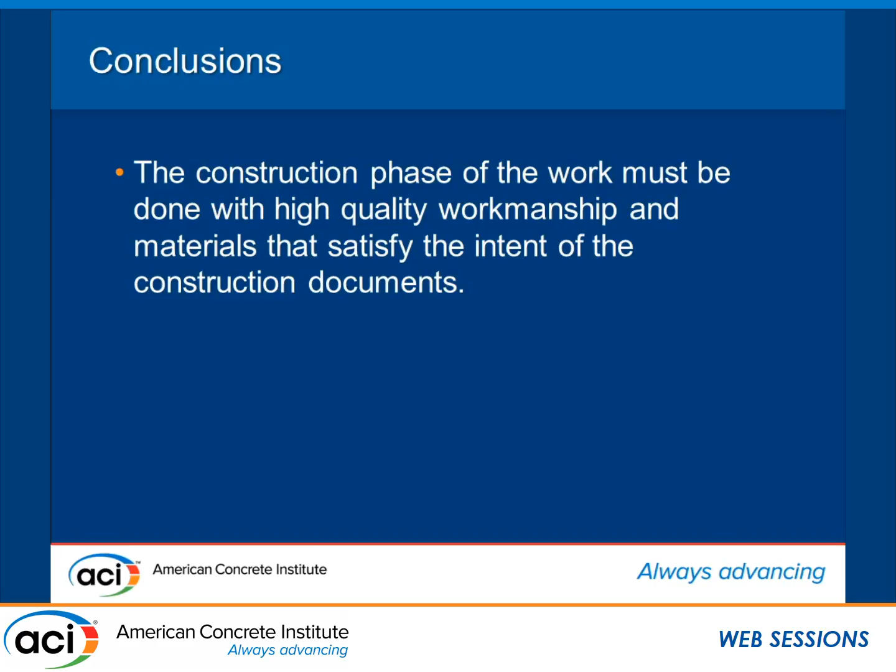So in conclusion, the construction phase of the work must be done with high-quality workmanship and materials that satisfy the intent of the construction documents. This code assigns certain responsibilities to the LDP during construction regarding quality assurance that they must understand and follow.